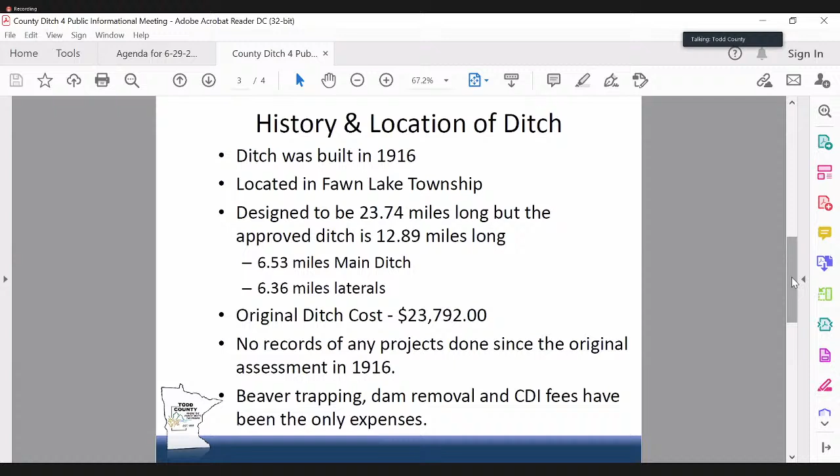Beaver trapping, dam removal, and ditch inspector fees have really been the only expenses on this ditch system—it's extremely good habitat for beaver. In 2013, when we did records modernization, we cleaned up all the assessment rolls and assessed for beaver issues from 2008 to 2012, totaling $5,484.23.

And then we got the ditch system brought up to zero. And then we started doing assessments, not yearly after that, but close to yearly.

2015 was $1,917.32, and that was all beaver dam or beaver expenses. 2018, $5,000 beaver expenses. 2019, $4,000 beaver expenses. The reason those are even numbers is because we wanted to have a cushion in the ditch, so as we kept doing beaver expenses, we would have money to cover it each year.

Then in 2020, we started dropping how much beaver expenses we were having. We were finally getting a little caught up. So in 2020, we did $500. 2021, we did $500. For 2022, we've been doing trapping again and some dam removal, so there's going to be those expenses again for the next year.

I think that's all I have, so that Mike can take over.

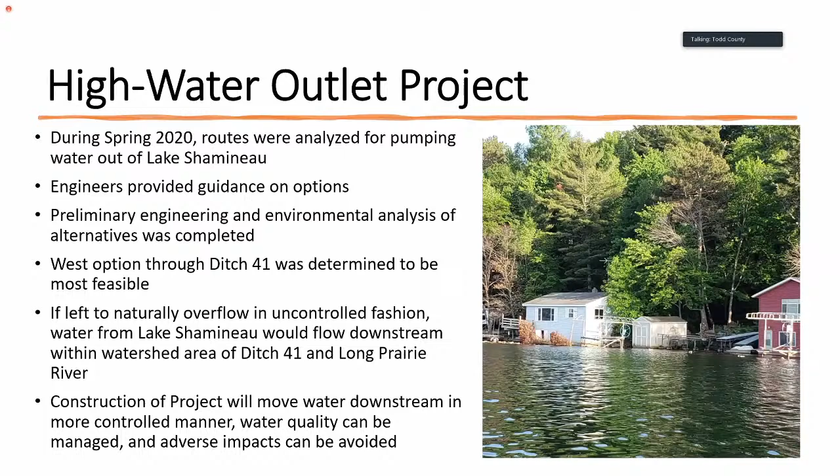The purpose of the high water outlet project is to establish a maximum operating level. It includes the installation of a lake outlet structure and pumping station at the west end of the lake. You have a route map in your handouts. Water will then flow west, eventually to Ditch 41 and to the Long Prairie River.

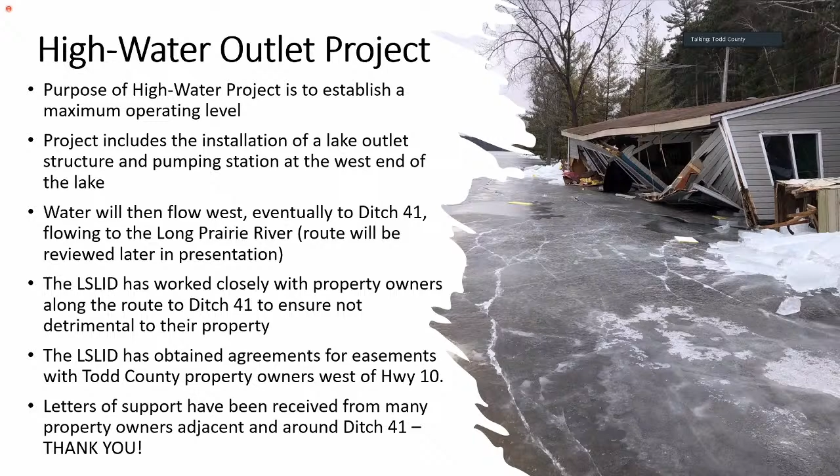We've worked very closely with landowners and property owners along the route - west of Highway 10 to the railroad crossing, where Ditch 41 starts. Those property owners are what we consider along our route, and we've worked heavily with them to obtain agreements for easements, which we have from all of them. We've also received letters of support from Todd County property owners, some along our route, some along Ditch 41, and other county residents. In fact, today we presented the Todd County Board with over 50 signatures on letters of support, and we'd like to thank those with us today for their support.

A couple of other project details: funding will be made through charges to Lake Shamineau property owners and also with Minnesota DNR flood mitigation grant funds. No petition costs will be charged to Todd County residents - all expenses will be paid by the lid.

We'd also like to thank Morrison County for their support. Commissioner Lemire from Morrison County wanted to be here tonight but had a conflict, and I believe he might be joining us through Zoom. They actually delegated authority to us for the project and have worked very closely with us on some of the project details. And they recently voted to contribute $200,000 toward the maintenance of Ditch 41 upon award of the construction contract for the project.

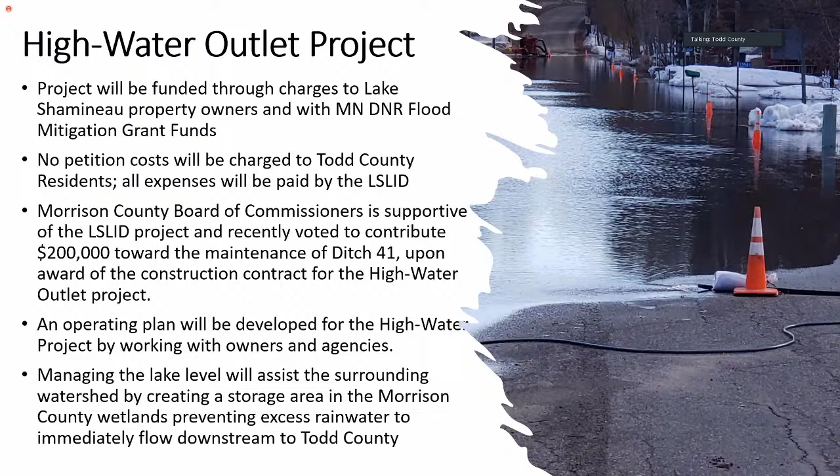An operating plan, as I mentioned, will be talked about more closely with Mike later in the presentation, but it's also a very key component of the project. Managing the lake level will assist the surrounding watershed by creating a storage area in the Morrison County wetlands, preventing excess rainwater from immediately flowing downstream to Todd County.

And last, but certainly not least, what if the petition is not approved? The high water outlet project will not be able to move forward, since access to Ditch 41 to reach the Long Prairie River is a key component of this project. And if it doesn't move forward, the $200,000 would not be made available from Morrison County. More importantly to us, there'll be continued flooding of homes and roads and more property damage around Lake Shamineau and Scandia Valley.

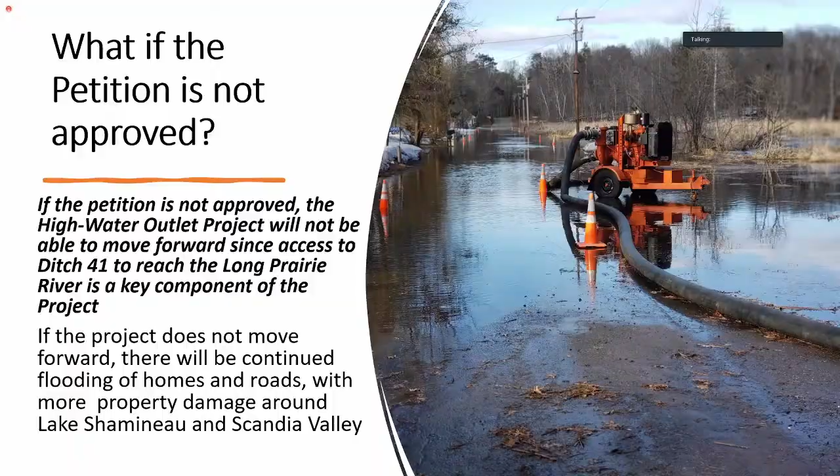Next, I'd like to introduce John Shockley, who is an attorney with the firm Ohnstad Twichell. The lid has hired John to assist with the legal aspects of the project, and he'll be reviewing the petition process.

Good evening, Madam Chair and members of the County Commission. My name is John Shockley, and I serve as attorney for the lid. I have extensive experience working with water projects, both on the side of the petitioner and on the ditch authority side. The petition process for this outlet petition is governed by Minnesota statute 103E.401. I believe your attorney, Mr. Dieter, had covered that previously, so I'm not going to go into great detail about that process.

As you know, Todd County Commission is the drainage authority, and express authority to outlet into Ditch 41 is started through the filing of a petition. The lid filed that petition with Todd County on March 8th, 2021. That described the necessity of the project you've heard tonight, and it also described the project features. Our petition, as was noted, included an engineering report on Ditch 41 and its capacity for the project.

That, of course, caused the County Commission to set a public hearing. We did have a public informational hearing on June 1st, 2021. If there are members of the public interested in where that recording can be found, we've listed out the web address.

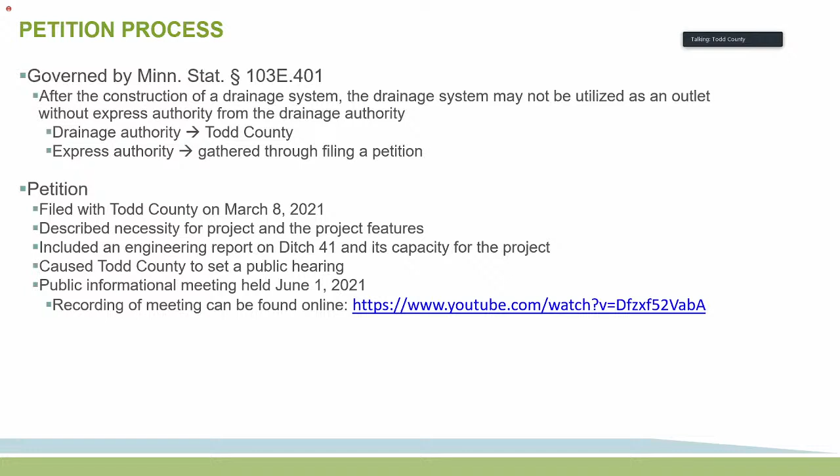Just briefly, the petition process involves the public hearing tonight. We're making our presentation regarding the project. And as has been previously noted, the main consideration regarding the granting of the petition is whether or not Ditch 41 has capacity.

I think this is more of a unique project than most. This is not just simply a property owner requesting an uncontrolled lateral to outlet into the existing ditch. Here you have a project in which it only pumps when the pumps are going, so you have controlled water flow into the system. During high water events, you're not actually adding additional water into the system.

So I like to think that it's very easy to satisfy the condition of whether there's sufficient capacity within Ditch 41, because at no point will this project operate when you have high water. So there will always be sufficient capacity within the channel.

If you grant the petition, we would anticipate that you would set the terms and conditions for our outlet. You would set the outlet fee, and then you would also describe what property is benefited by the use of Ditch 41.

Having worked on projects very similar to this, the operating plan is really a critical component, and we recognize that. That is how the ditch authority prescribes the controls of when and how we can pump water out of the lake into the ditch. And that really protects the property owners from ensuring that we're not pumping during high water time periods. It also sets forth that if we're violating that operating plan, we risk losing the ability to discharge into Ditch 41.

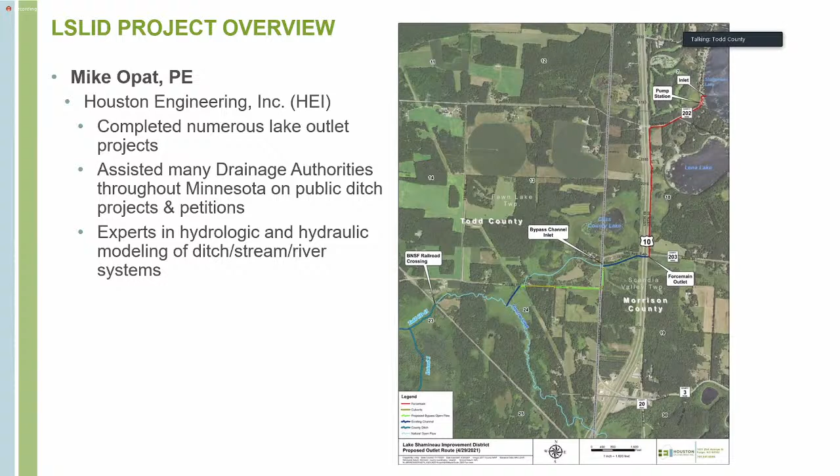So with that, the slides—many of you who were at the public meeting are going to recognize a lot of this, and it's going to sound familiar. As a courtesy to those who weren't at the public informational meeting, we're going to go over it again. Part of the reason a lot of these slides are here is just to build the public record. I won't necessarily get into all of it in great detail, just to keep things moving, but I definitely will hit on the important parts, and then we can address any questions that come up.

So a few quick definitions: cubic feet per second, annotated by CFS. That's a flow rate—how we in the engineering world, and how flood forecasters, deal with flows in streams. I know a lot of people like to hear things in gallons, so there's the conversion: 1 cubic foot is 7.48 gallons. We'll have more discussion on gallons in a second.

If we refer to AIS, that's aquatic invasive species. There's not as much talk tonight about 2-year flows and 100-year flows, but if we come to that, I'll explain it. As Cindy said, LSLID is the Lake Shamineau Lake Improvement District. I want to note that all the elevations in my presentation refer to the vertical datum of 1929. I know the county has other data in the 1988 datum, but the Lake Shamineau records and readings are all in the '29 datum, so we're designing our project to '29 for consistency, referencing that datum throughout.

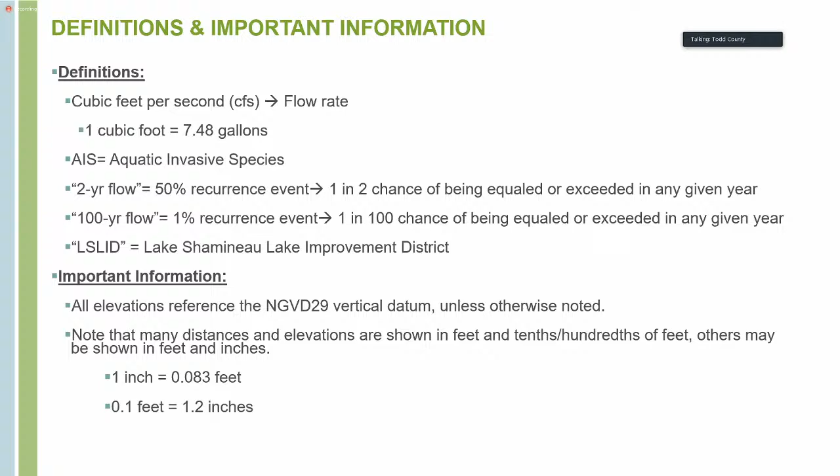Engineers like to do things in tenths of a foot, while architects and the general public typically like to do things in inches. So I'm trying to convert—as you saw in the public meeting presentation, we had both on there, and we tried to carry that forward here. 1 inch is about 0.08 feet, and 0.1 feet, or a tenth of a foot, is about 1.2 inches.

We're going to talk a lot about 10 CFS, and we get lots of questions on what that actually means. So you can see the cube there—that cube is 2.15 feet all the way around. Do the math, and that's 10 cubic feet per second. In real world terms, most people can understand and picture a culvert, so I included this diagram. If you had a 24-inch culvert on a typical slope of about 0.5%, as that culvert's right at full, not under pressure, the capacity is going to be right in the ballpark of 10 cubic feet per second.

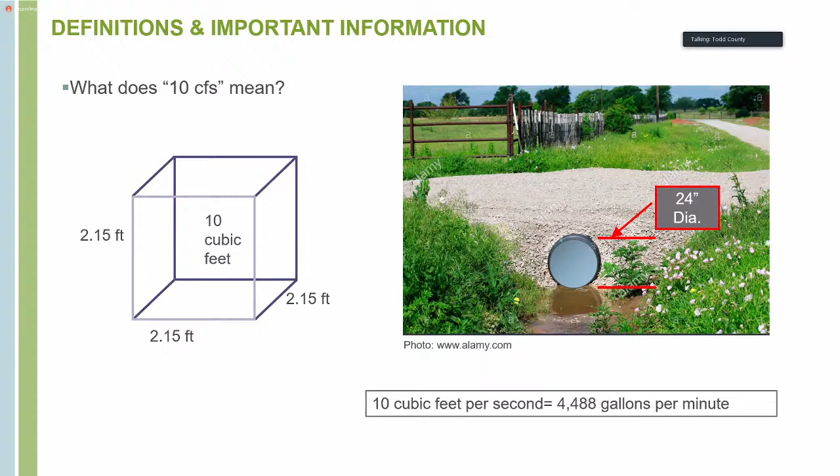So if you picture that amount of water in that culvert being added to the system, and look at the future photos and diagrams we have, that will hopefully help you visualize what that impact is going to be and how that water works its way through the system. In terms of gallons, 10 cubic feet per second translates to about 4,500 gallons per minute—that's what the pump is sized for. We can do all kinds of math on how many gallons that is; I'll talk about the volume that needs to come out of the lake in a second.

We got some questions, and there was discussion at a recent work session about process and order of things, so I wanted to hit on that. That green line is going from the beginning of the process to the end—feasibility study through operation. The blue line up top is where we're at with the ditch petition process, so we're still very early on. As Cindy talked about, some of the first steps were those feasibility studies where we looked at the different options and determined the most feasible option.

From there, we needed to do enough design to confirm that we can get the water from the lake to a suitable outlet, including Todd County Ditch 41. At this point, Cindy and the others went through the process, working with landowners to secure necessary agreements.

We've had preliminary discussions with the agencies involved in the permitting process to confirm there are no showstoppers. But the key component, as Cindy hit on, is can we obtain permission to use Todd County Ditch 41 as an outlet? Because if the answer there was no, then we have to go back to the drawing board.

So we need that answer before we can advance the design, which the agencies are requesting before we submit the permit applications. We submit those, they act on them for final approval. Assuming that all falls into place, we move forward with final design, put it out for bids, assuming everything is on budget.

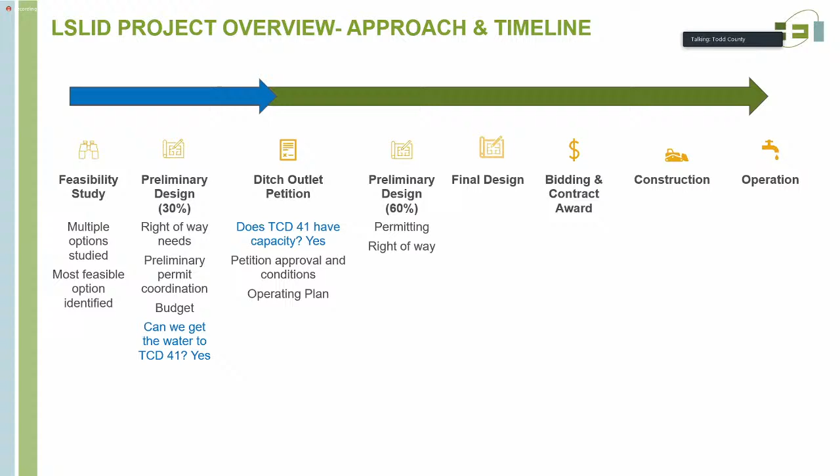The LID can award a contract, and then we move forward with construction. So there's definitely an order to things, and at this point we need a decision on the ditch petition before we move forward with any further permitting or design or related project components.

Just a little bit more on that. We've touched on the feasibility studies, a little more on the permitting. We've worked with the DOT, and they've confirmed that the project is permittable and that they can issue a permit to the LID.

The DNR has been great to work with. They've reviewed the preliminary plans, and again, no showstoppers. We'll work with them on the permit process, which will include approval of the final operating plan, and we'll get into that much more here in a second.

We've worked with Morrison County in terms of not only the highway department, because there will be impacts to their roadways, but we also have some zoning permissions that will be needed. We've been working through those, and again, no showstoppers. The direction we got from them was make sure you get everything squared away on the downstream end. Get that in place, come back, and we'll work through our process on the zoning.

Wetlands are definitely a key component, but those wetland impacts and permitting are basically confined to the footprint of the construction, so everything well upstream of Todd County Ditch 41. We've had preliminary discussions with those folks, and they've reviewed our delineations and approved those.

At this point, again, after the petition is hopefully approved, we'll be able to move forward with design. At that point, we'll submit those plans along with our proposed mitigation efforts, and those agencies will review and hopefully approve it. But we can't take that step until we have the ditch petition resolved.

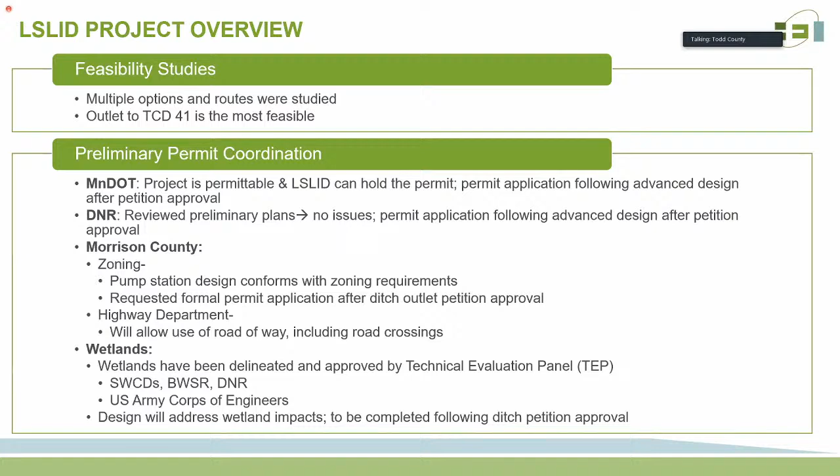We went through this at the public informational meeting, but I want to give everybody an overview of how the water gets from the lake to ditch 41. Although that's really not the purview of the petition, because that's basically tied to the capacity, which is independent of how the water gets there. But I think it's important to provide everybody with some background and context.

So Chris, I'm going to probably do some pointing here, if you can follow with the cursor, that would be great. The upper right-hand corner of this map is the westerly edge of Lake Shamineau. The proposal is to have a gravity intake pipe that extends out into the lake in this vicinity. That gravity pipe will flow and bend and come down to the curve in Aztec Road.

At that location, we have a filter and a pump system. That pump will lift the water up, push it through the filter. That filter will remove the aquatic invasive species and take that filtered debris and species and put it back into Lake Shamineau. Only the clean water will move downstream through the force main, which follows Aztec Road and then continues to follow the easterly edge of US Highway 10.

Again, we've been working with the DOT on that, and we should be good to go on that standpoint. From there, you can see Chris's cursor there. That will be the outlet structure, which will discharge the water into the recently cleaned out ditch that I guess is referred to locally as the Blue Line Ditch.

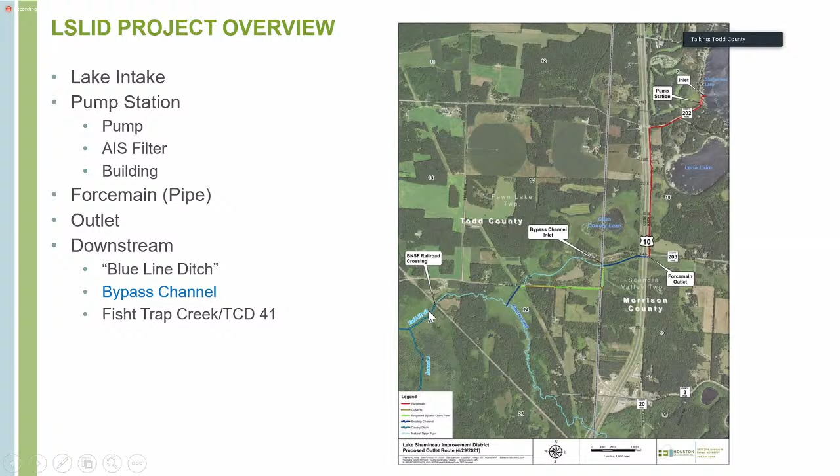So again, key features, we've talked about it a lot. The pump discharge rate is a maximum of 10 cubic feet per second. This is a balance between the downstream capacity and lowering the lake down as quickly as possible. There were other projects that were looked at and proposed with higher flow rates through discussions with agencies, property owners, and various stakeholders. The LID looked at that and struck this balance with 10 cubic feet per second.

And that's the focus of the project and the focus of the petition. As Artis hit on, the One Watershed, One Plan effort is underway. They've discussed high water issues on lakes like Lake Shamineau, and it sounds like those types of projects are likely to be included as a goal with that planning effort.

As we've also discussed, the lake is part of the watershed for not only the Long Prairie River, but the way it gets to the Long Prairie River is through Fish Trap Creek and Todd County Ditch 41. So we wouldn't be moving water from a different watershed into the Todd County Ditch 41 watershed. That's its natural watershed if it were ever to get high enough to overflow that way. And so again, as John hit on, what the LID is really asking to do here is to utilize the excess capacity in Todd County Ditch 41.

And through the operating plan and the pump controls, that simplifies the answer to the question of whether the ditch has capacity or not. So we'll still go through that here, and then we'll talk in detail about proposed conditions in the operating plan. In terms of anticipated operating period, the calculations that were done to help guide the LID...

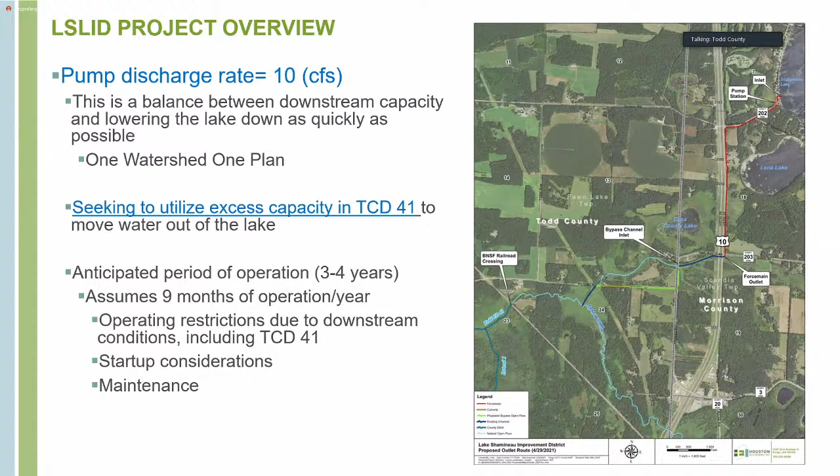Some more key features. We've talked about the AIS. I mentioned the filter — again, no AIS will be transferred downstream. We've looked at the water quality in the lake. It's very good. It should help water quality conditions downstream.

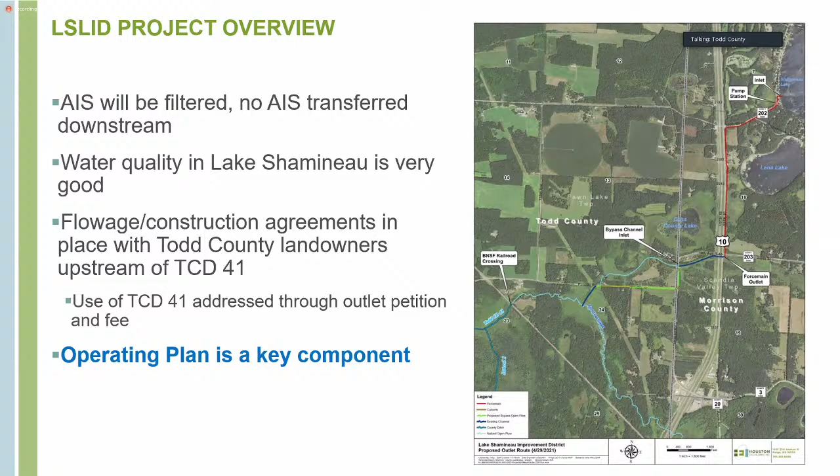We've mentioned the flowage and construction agreements with the landowners between the outlet of the force main and Todd County Ditch 41. And again, the point of the petition here is to secure permission to use the ditch as the outlet. And the key point here is the operating plan is the crux of the whole discussion. So we've established that it has capacity, and now it's just defining when it does and how much, and what are the associated conditions of moving that water through the system.

So let's dig into the operating plan, and we'll talk about it in general. Then I'll get into some of the brief technical components, and then we're going to circle back at the end to specific criteria in the operating plan. So what is an operating plan? It's an actual formal document. It dictates when the pump can be turned on, including specific criteria for Ditch 41. It'll dictate when the pump must be turned off, again including specific criteria for Ditch 41.

And then it will dictate where the conditions need to be monitored and how frequently they need to be monitored, and who will be doing the monitoring and who needs to be notified, and all those details.

So the board has been provided with a draft, and we'll talk about that. I know we just received some input from County Engineer Fellbaum, so we appreciate that, and we'll definitely reflect that in the next draft. We'll talk about the process for moving from draft to final here.

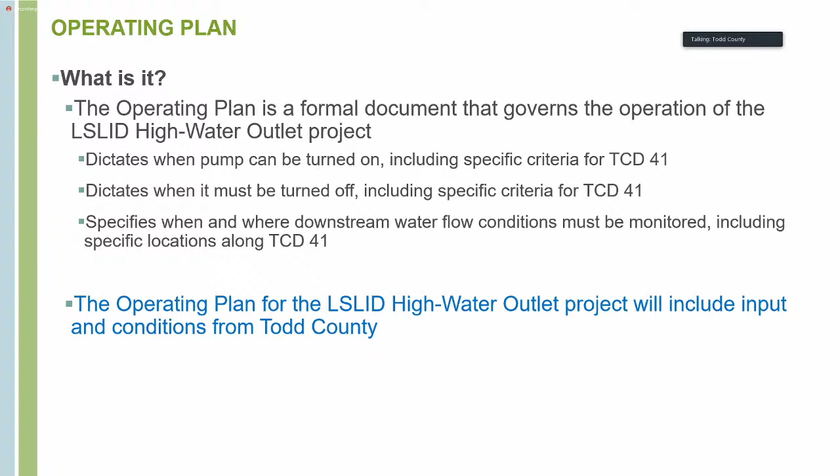It's important, right? This is the whole point of interaction and coming out of the hearing and further discussions, working together to put appropriate and reasonable and acceptable conditions into the operating plan that will govern the operation of the project. So, key points here.

The lid cannot arbitrarily change the operating plan in the future. The DNR is going to make this operating plan a condition of their permit, but they've told us that anything that impacts Todd County Ditch 41 is going to be up to the county and the drainage authority. So they're going to wait to receive your input, and they're going to confirm with you that you agree with those conditions. And if there are any future updates, they're not going to allow those unless the county signs off on it.

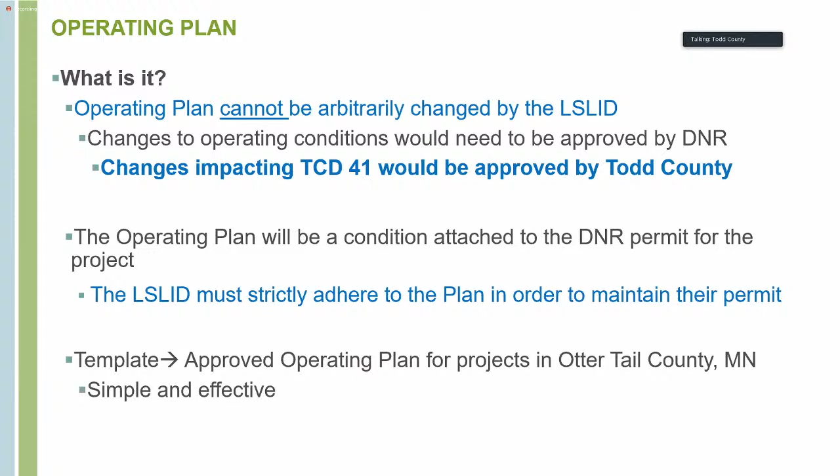Again, the template we're using is a plan that was used for other projects, specifically in Otter Tail County. It's intended to be simple, but it's proven to be effective. So we're not going to break something that isn't broken there. It's a good, effective plan, and it's proven to work.

So in simple terms here, the operating plan dictates when the pumps are on and when they're off, and the lid has to comply with that. Simply put, if the ditch does not have capacity, the lid will not operate the pump. If the ditch does have capacity, the lid might operate the pump if other conditions are met and if there's a need to operate it. Okay, simple terms, that's the crux of the whole thing. The rest of this stuff just helps identify and further define those points.

A key question we get is, is the lid guaranteed they're going to be able to operate their pump? No, I want to stress that. The operating plan does not guarantee that the lid will be able to operate their pump. Even if the homes are flooding out and roads are underwater, if the conditions in the operating plan can't be met, they cannot run their pump. The lid understands that. They have wrestled with that risk. They understand that risk, but this is their best, and quite frankly, probably only option is to go this route. So they're taking that risk on and they're going to live with those conditions.

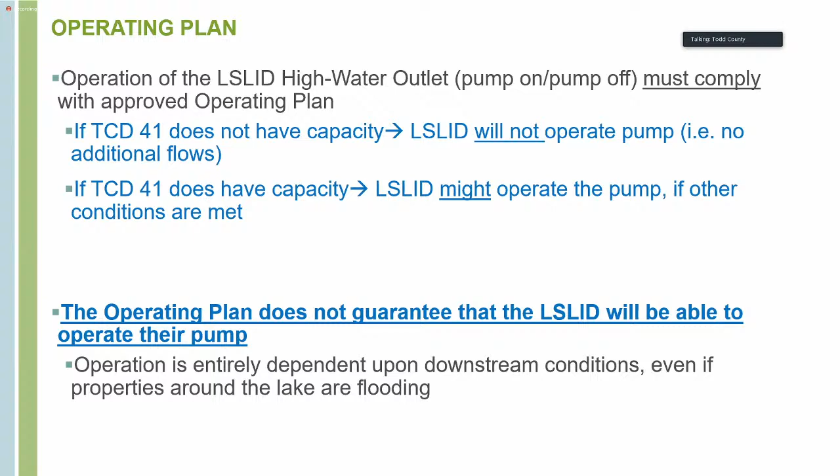So some more on the operating plan. Again, we want the county's input on this, and we provided the draft. We'll solicit input, we'll work through that for as long as it takes. Hopefully we can get this wrapped up pretty quickly.

One question we had was notification. The lid who will be operating the pumps will certainly notify the county. We can work out those details as to who is notified, how they are notified, all those things. We'll take your input and we'll incorporate it into the plan.

As we talked about, the operating plan will be a condition of the DNR permit. Again, they are going to rely heavily on input from the county. And another key feature here is because it's tied to the permit, if the lid does not operate the project in conformance with the operating plan, they are at risk of having their permit suspended or revoked, such that they couldn't use their project. So they're not going to invest millions of dollars in a project and then improperly operate it and have it sitting in mothballs because they didn't operate in conformance with the operating plan. So that's the teeth in it. That's additional protection for the county and the landowners, is that they've got that hanging over their head in terms of the teeth requiring them to operate in conformance with the plan.

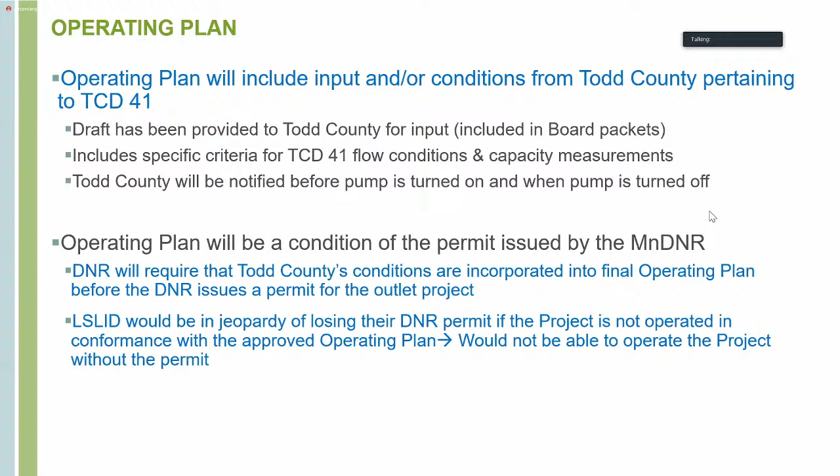All right, some additional key points. When we start talking about the plan and capacity, and when the ditch is full and when it isn't, those are the types of things we want to specify in that plan, so there's no arguing or subjective discussion about when it's full and when it's not. That's what we want to get hammered out as best we can ahead of time, and that's what we want the county's input on.

Another thing I like to do is etch a line in the concrete and paint that etch. If the paint wears off in a year or two, we've got that etched mark in there and we go back and paint it again, big bright red, so everybody can see it. The LID can see it, the county can see it, the landowners can see it, the general public can see it, and everybody knows where we're at in terms of that critical elevation at each spot. We'll talk more about that in detail.

We have what we call primary gauges, which are generally at publicly accessible locations like road crossings. And we're proposing some secondary gauges, which are generally located on private property to help us manage specific criteria that are in some of the agreements the LID has with landowners.

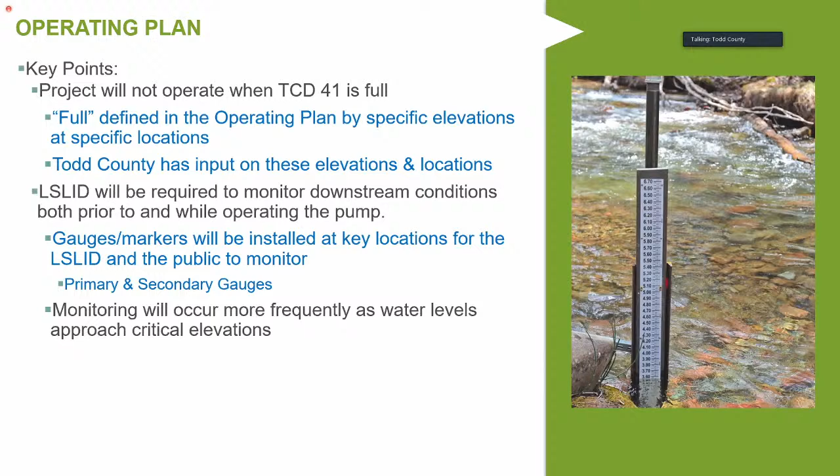Another key feature is that we're proposing the monitoring of the system will occur with more frequency as water levels rise and approach the critical elevation. So if we had conditions like we've had recently and the ditch is down low, adding 10 CFS is not going to raise water levels anywhere close to full capacity, so we would monitor it less frequently as proposed in the plan. If water comes up a few feet, we definitely want to keep a closer eye on it, so we'd be monitoring on a more frequent basis. We'll discuss that more in a second.

Getting into a couple specifics on proposed monitoring locations, our primary gauges again are trying to identify public roadways as good options. Starting from the upper end, we're looking at Pulaski Road, Quicken Road, and then downstream at County Road 28.

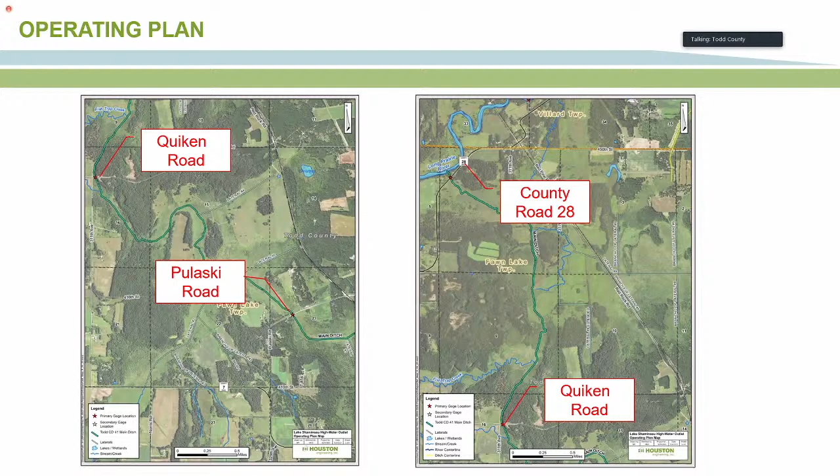We've looked at potentially adding something up near the railroad bridge, but access there is a bit of an issue. We've begun discussions with the railroad to see what we can do there, but if we can't put it on the bridge, we can work with some of the landowners there hopefully. The good news is that due to the slope of the ditch and the analysis we've done, we can handle the monitoring at that location at Pulaski Road, and we don't have to have a gauge at the railroad to help manage the system.

Again, we've talked about notification. The plan also includes considerations for weather and seasonal climate conditions like spring runoff. So we'll be using available forecasts for the river and other streams to help guide the operation of the system and the need for monitoring.

Another key feature is that blue line ditch upstream that I talked about. That ditch is much, much smaller than Todd County Ditch 41, so we've got restrictions on it based on agreements with landowners. That's probably going to be our limiting factor on whether we can move water with the pump or not. We've got to get through that bottleneck before we can get down to Todd County Ditch 41, so there's some additional protection there, so to speak, in terms of water coming down the system into Todd County Ditch 41.

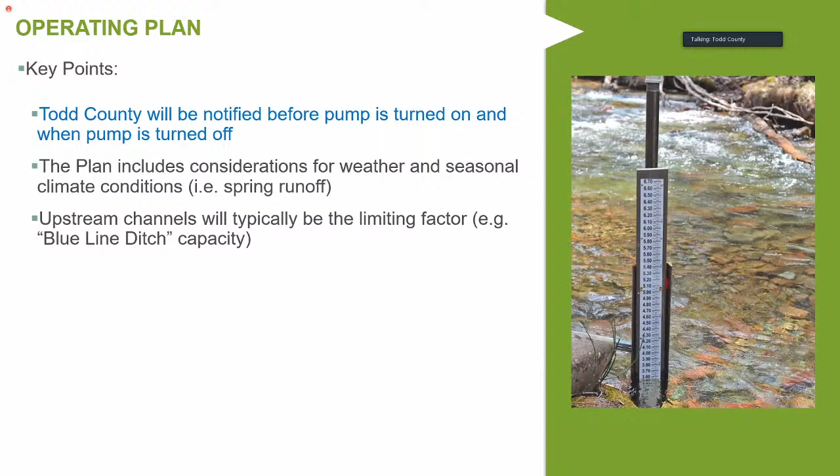So where are we at in the process? I know there were questions on this in terms of the draft operating plan. We worked with the LID to prepare an initial draft of the plan, using a template from the operating plan for the Little McDonald and Devil's Lake project in Otter Tail County, and addressed specifics for this project. We took that and met with the DNR and got their input in terms of format, content, and general conditions from their standpoint.

They said, look, this is all great, but you're going to need Todd County's input on the ditch. So we took the DNR comments, created an updated draft. We waited to get input from the public and the Drainage Authority at the public meeting held on June 1st, then incorporated those comments and that input into an updated draft and provided that to the county recently. We were looking for, eventually, feedback on the triggers and what the conditions would be in there to help facilitate the discussion.

We took our updated modeling results and came up with proposed trigger elevations and put those into the document, to help facilitate the discussion. We fully appreciate any further discussion the county wants to have on that. For the board, your packets included version 4, which did not have the trigger elevations in it. We've updated it to version 5 and provided you with the 2 pages that have changed, now inserted into your packet. So when we take any additional feedback tonight or in the coming week, we'll update another version and get the version control taken care of.

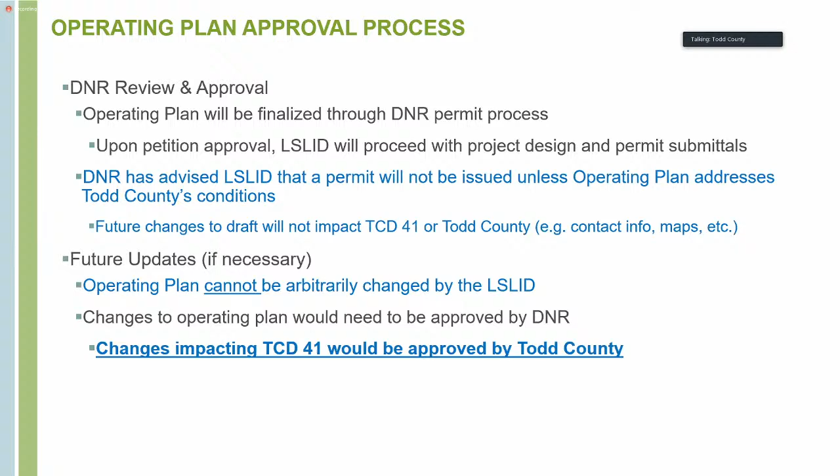So Kurt, how are we doing? Good, okay. I said 2 hours is when people say that's enough, so we're an hour and 5. I think if we broke it right now, we'd lose continuity. But the restrooms, we maybe didn't say that—restrooms are right over there. If somebody needs to get up and stretch or stand in the back to move, but let's keep moving unless the board feels different. Good to go?

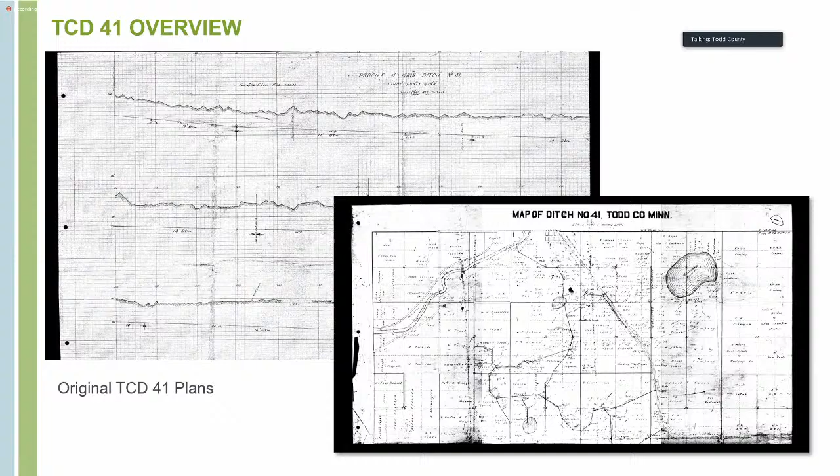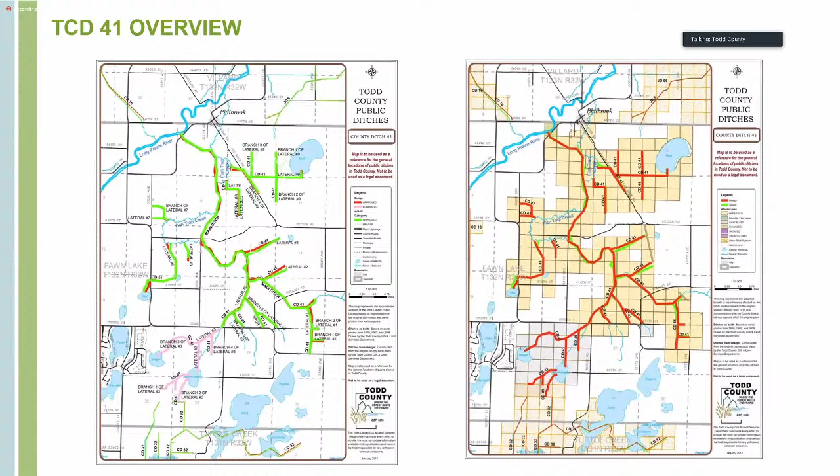The original plans on this slide actually look much different. There were other areas included that aren't part of the ditch system now—Nancy mentioned it was originally going to be over 22 miles or something like that, so it's kind of interesting from that standpoint. The map on the right is the ditch system, and those shaded boxes are the benefiting properties that are part of the ditch system.

Originally constructed in 1916, it was designed with varying ditch slopes and varying ditch bottom widths. The laterals were designed typically to enter the main ditch at elevations a couple feet higher than the main ditch. The watershed area, which includes Lake Shamineau at the upper end, is about 81 square miles, so it's a pretty significant amount of water. It's also taken from Fish Trap Creek, which is taking base flows out of Fish Trap Lake in that system.

As Nancy mentioned, it appears there's minimal documented maintenance that has been done, with the exception of beaver dam removal and trapping throughout the system. I know there's been discussion on a potential cleanout of the ditch. I think it's important to note that a cleanout can only be done to the original condition.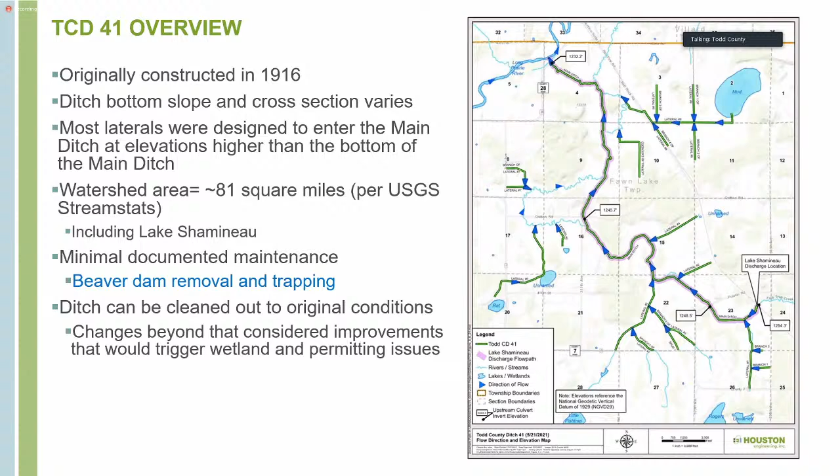Anything beyond that is an improvement that would then be subject to current permitting and regulatory requirements, so that's definitely going to be a challenge at best and probably impossible in reality. We can certainly look at future maintenance, but in our opinion we don't need to do maintenance in order to accommodate the flows from the project. Any maintenance that is done would just provide additional capacity and allow more water to move through the system, but it's not a necessity to get that done before any water comes in from the lake.

Let's talk a little bit about current conditions. I mentioned this at the previous public meeting - we did do a drone flight of the main ditch alignment back in November of 2020. The key points were beaver dams at that point in three general pockets: the upper end, the middle, and then downstream through Bruce Hudala's area.

After the public meeting held on June 1st, the LID and I met and talked about some of the questions and concerns raised. They authorized us to go out and collect additional information and further refine our modeling and analysis of the ditch, so we sent a crew up there. I can tell you those guys were not happy - I know one of them picked off 22 ticks in one day, and they were trudging through a lot of muck. I know Nancy can testify some of that peat is pretty nasty, so I've got to give kudos to our guys for doing that. The LID helped us coordinate access for that, and I appreciate those landowners for allowing us to access the ditch for that work.

The good news was we found fewer beaver dams. Particularly on the upstream end, it looked like a lot of those were gone, and in the middle as well - the dams are either gone or had been manipulated such that they weren't holding back as much water. So that was good.

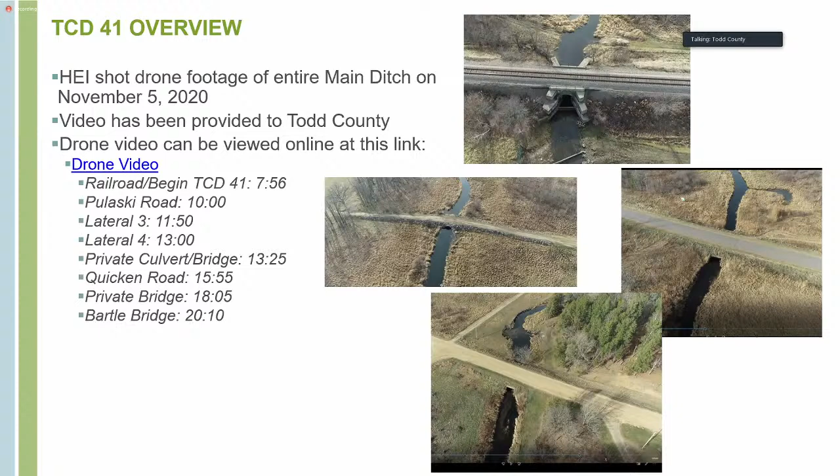This is a similar slide to what we showed at the public meeting. It includes a link to the drone flight - I'm not going to play the video, it would take 20 minutes to go from top to bottom, but if there are specific questions we can certainly bring this up to address any particular concerns.

So a couple key points with this map - I think this one might be one of your handouts. As we talked about in the project route overview, the water is going to enter Fish Trap Creek, which then becomes Todd County Ditch 41 at the railroad crossing there.

So we've identified that in the map as the point where the water would enter the ditch. It's going to flow down the main ditch and be contained in the main ditch. It won't be flowing through the laterals or breaking out into the floodplain. We'll be using the main ditch to get all the way from the railroad down to the Long Prairie River.

In addition to the laterals not being used, we're also not going to be adding flow at the top end of what I call the old creek loop there at Quiken Road, where I'll point it out. This is the original creek channel. There were no improvements done to that as part of the original ditch project. There's a culvert through 311th Avenue here, and the bottom of that culvert is higher than what we're proposing to set for the maximum operating level with the pumps running. So we wouldn't be pushing any water to the west there.

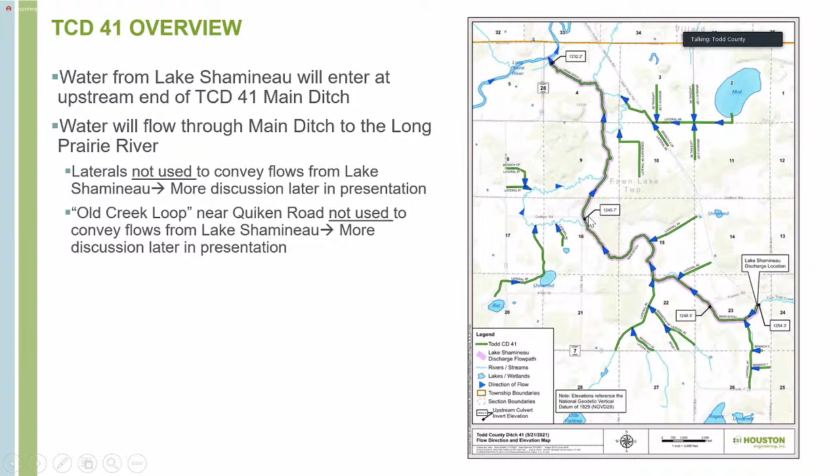And we'll get into more detail on that here in a second. So this map again is just to more or less show the extent of the ditch. I brought this in just to address any questions that might come up.

As we've talked about, the crux of the discussion here with this petition is whether or not the ditch has capacity. The simple and direct answer to that is yes, and we can state that for the following reasons. We've done channel surveys, we've done some hydraulic modeling, and we've observed the ditch visually.

But it comes down to that operating plan. You can look at the photos there and see how deep the water is in there. Through that operating plan and the controls of the pump, we know that we can limit adding flows only to times when there is sufficient capacity in the ditch. So from here, we really just need to focus on the conditions in the operating plan to make sure it addresses any limitations that are required to ensure that's the case.

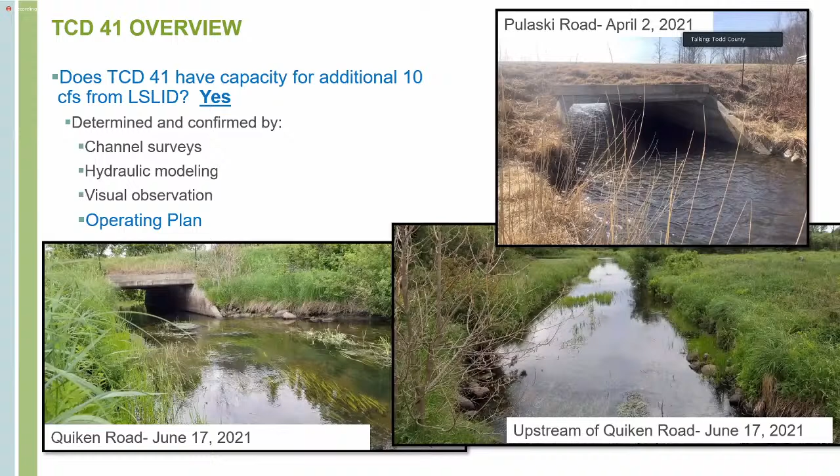I want to just talk about hydraulic modeling because we are going to talk about the model. In terms of the operating plan, the pump and the plan are dictated by actual conditions in the ditch, not the model. So we can talk about the modeling and look at the details of that model, and you can get second and third opinions on that. But as I say here, the proof is in the pudding, right?

We're going to look at the actual ditch at our monitoring locations, and we're going to look at those conditions and say, is it full or not? If it's full, the pumps aren't on. And if it's not, the pumps might run. That's what it boils down to.

Now, we do have a model. That model should be looked at as a tool. We can use it to help with the monitoring and the operation, but the real world conditions in the ditch are going to control the operation of the system. That's a key point. I want to make sure we stress that.

I also want to point out that as the conditions are finalized, the LID is going to have to look at that. As we talked about their risk in the operation here and investing in the capital side of things to build the project, based on those conditions, do they feel like they're going to get enough capacity and operation time to pump water? That's for them where the model will be helpful, because they can look at it and say, okay, based off of past and recent conditions, the model tells us that, yeah, we think we can get 9 months of operation and that we think we can get our lake down in 3 years as assumed.

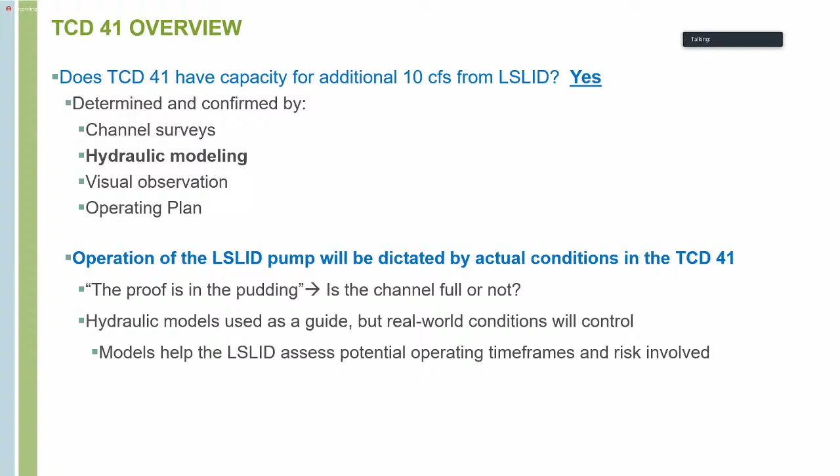So another key point here, when we say does the ditch have capacity, the answer is yes. I want to stress that that's based off of existing conditions, based off of the survey data that we collected on June 17th and 18th, and also back into April. Those are the conditions reflected in the model and in the diagrams that you're going to see. If the ditch was cleaned out, the conditions would get better, beyond normal beaver dam removal.

So conditions would improve, but it's not necessary to do those cleanouts in order to realize any of the capacity that we're talking about the LID potentially using. So to stress that, cleanout would provide additional capacity potentially, but it's not necessary to pursue that before adding water from the LID's project.

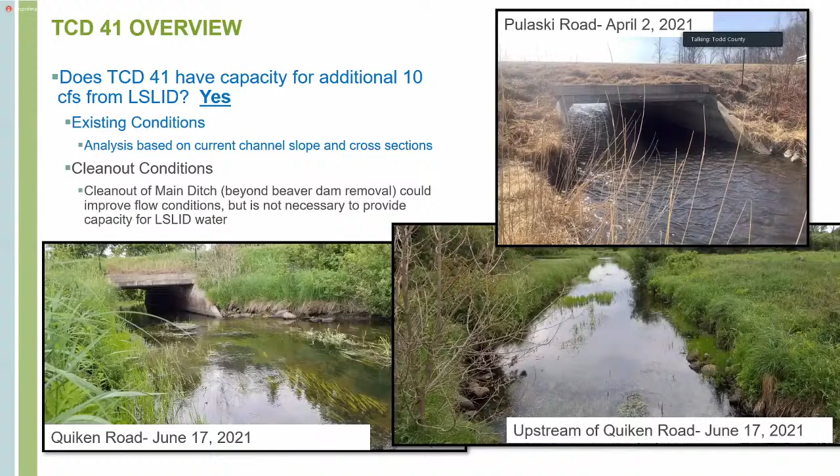Again, I've noted some photos here. You can see the dates on those and the locations there. We'll see some more of these types of photos here in a second with some more diagrams. So this is where you might recognize some of these slides from before.

When we talk about hydrology, we're talking about the quantity of water, and then that transitions into hydraulics, which is how that quantity of water moves through the system.

So we went into a lot of detail on this during the public informational meeting because at that point, we were still talking about whether the ditch had capacity or not. At this point, as we've talked about, we've established the answer to that is yes, and we're now moving into the conditions phase. So while this is all still relevant and important, it's not critical to the discussion.

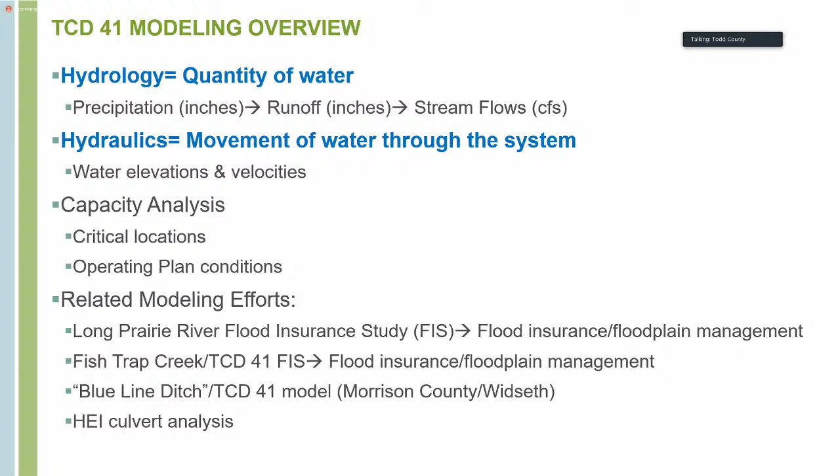So I'm not going to go into quite as much detail. Again, it's here to be on the record, and I can certainly address this, but it's not critical to the discussion here. So with that, this is a diagram.

This goes back to the original ditch petition back in March. From here, the LID has continued to provide additional information to support their petition and further refined the analysis. So we made some assumptions, for example, at this location that the water was 3 feet deep when we started to pump.

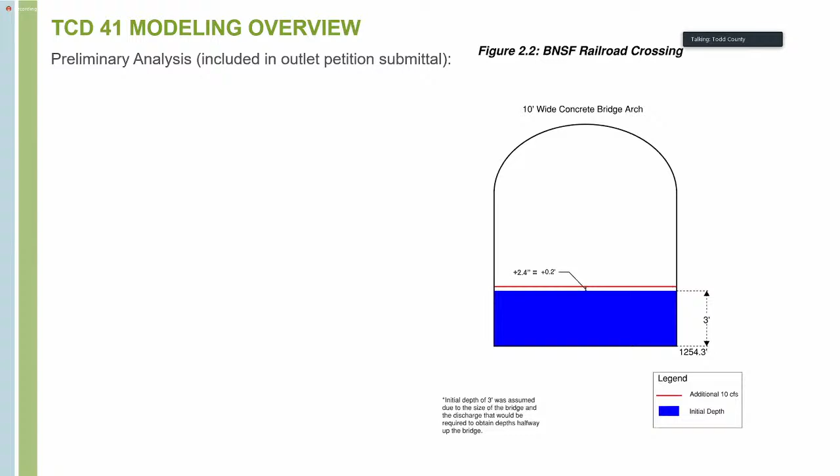With the modeling we've done now, we know what a starting condition is. And so you'll see a slightly different example of this, but the short answer to the story is the results don't change significantly. And what we're finding is that even as we refine the models, add more detail, we're still getting the same answer. It's just a refined answer with a higher level of confidence, so to speak.

So again, the hydrology component of the analysis that we're working with at this point is not critical, and I'm going to explain that as we go forward. There are existing models that are out there, and we are using those as a basis.

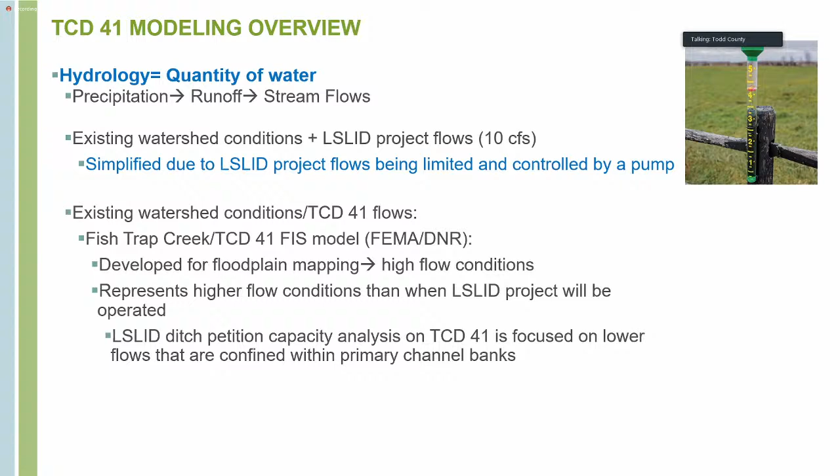For example, FEMA and the DNR have a model of Todd County Ditch 41, but they're using that for floodplain management, and they're looking at the water that's going out in the overbanks and flooding fields and roads and those types of things. We're looking more at, obviously, the flow in that lower channel, the primary channel, which those models don't have a lot of detail on. So that's why we went out, collected more survey data to supplement these models.

Okay, a lot of information here. We went through this at the last meeting. So as we talk about the quantity of water, fortunately, the government through the United States Geological Survey has a nice website called StreamStats. Anybody here can go there and you can start clicking anywhere in the watershed. And as long as you click on a waterway that they have identified, it'll tell you what the various estimated flow rates are for different recurrence events.

So again, a 2-year event, that doesn't mean it happens every 2 years. That actually means it's a 50% chance. So, do the math and flip the fraction over. It's a 50% chance on any given year. Okay, so what's the significance of this?

The point I want to make is a 2-year event in the stream correlates to about a 2.6-inch rainfall. And when you factor in the portion of that getting soaked into the ground and some of it evaporating, the net result at the upper end of the ditch is 95 CFS, okay? 95 cubic feet per second. We're talking about adding 10 cubic feet per second. So we're roughly 10% of the flow at that rate.

Now, the bottom point, another key point here, is when engineers and scientists talk about bank full capacity, that's the maximum amount of water that a channel can contain before it spills out and floods in the overbank. Typically, what's been found over years and years of analysis is that, especially in a case like this where the water's been flowing through here for 100 years, it's very predictable what a system's going to do in response to that flowing water. And typically what we see is that the bank full discharge typically corresponds to about a 2-year event, somewhere around a 1.5 year to a 2-year event.

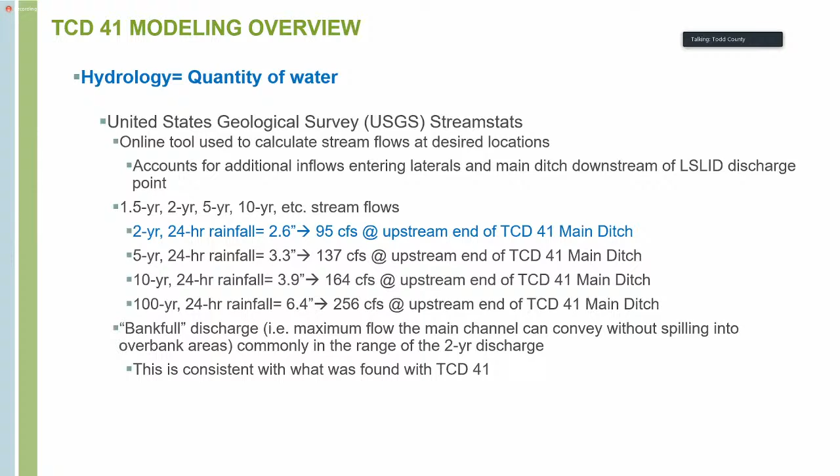You may recall at the June 1st meeting we talked about measurements. The LID has had folks going around measuring down from these culverts to get depths. That helps us calibrate our model, and it also helps us convey in real world terms what the impacts of the project will be. You may recall seeing some of those examples. I have updated examples we'll go through here in a second.

Rating curves: in simple terms, we plug in assumed flows, run those through the model, and look at the results. That helps us identify at what point the water starts to break out of the channel, or at what flow rate a certain culvert might get inundated. Then we can focus the rest of our efforts after that.

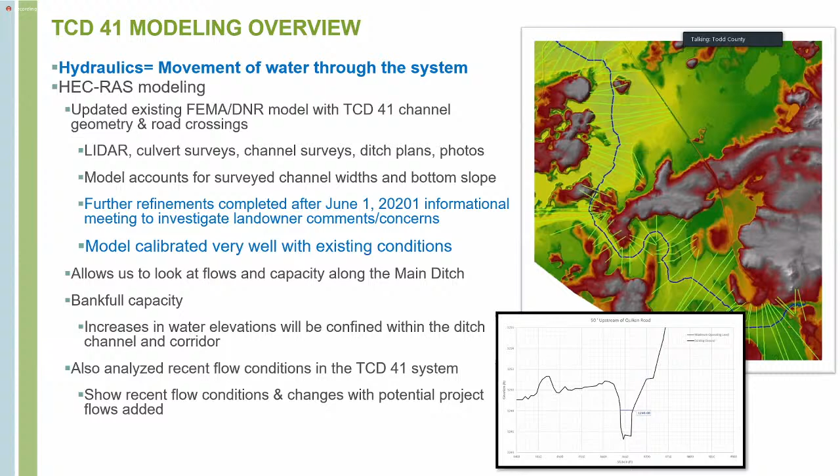Alright, welcome back. I had some comments that I'm hard to hear, I think I'm wandering from the mic. So I told those folks that if I wander away to wave, and Kurt will get my attention, and I'll chain myself here. So with that, where we left off, we were just starting a discussion on the modeling, which I'm sure is everybody's favorite topic here. But a few key points: we had talked about modeling at the June 1st meeting. As I mentioned, the LID sent us out with a mission to collect more data and refine our model. So we did that. The good news is that the results are that we came out with a model that calibrated very well to the conditions we saw out there on June 17th and 18th. So again, that gives us a lot of confidence that this tool is reliable and we can utilize it as we move forward. With that, I'm going to talk through the process here a little bit.

A key component of the analysis, and how we'll determine what the maximum operating level will be, is exactly what the capacity of that channel is.

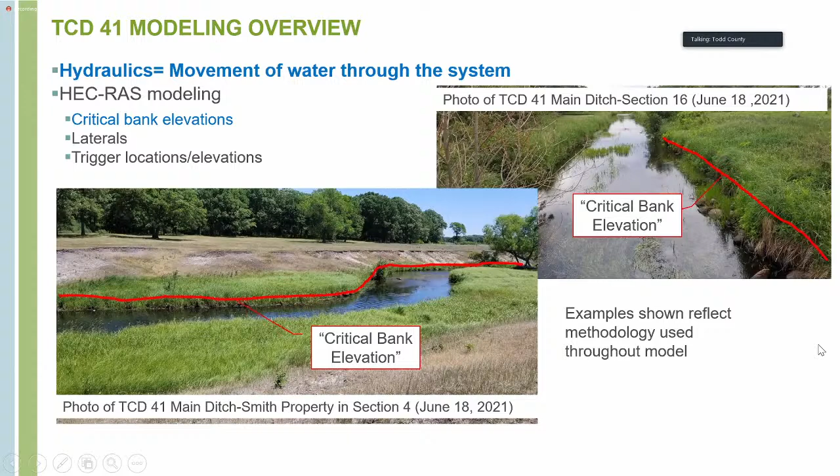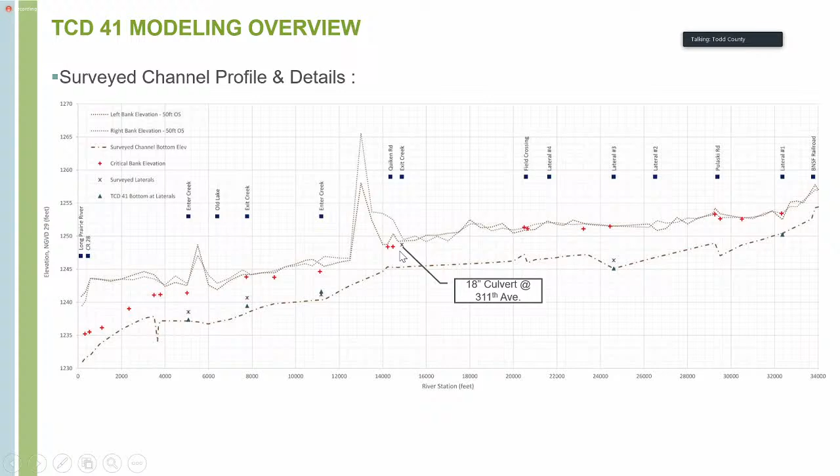One last point on this slide: the culvert through 311th Avenue, near Quiken Road near that intersection, is where the old creek loops out and around. That 18-inch culvert controls how much water leaves the main ditch and goes into that loop. You can see it's considerably higher than the bottom of the ditch channel. Just as we're using these red marks, we're also using that culvert as a controlling factor to make sure when we're using the pump, the water isn't going to be above that culvert. So we're not going to push water over to that old creek loop.

So as I talked about, we surveyed those channel features. As we went through the system, we also surveyed the water surface elevations.

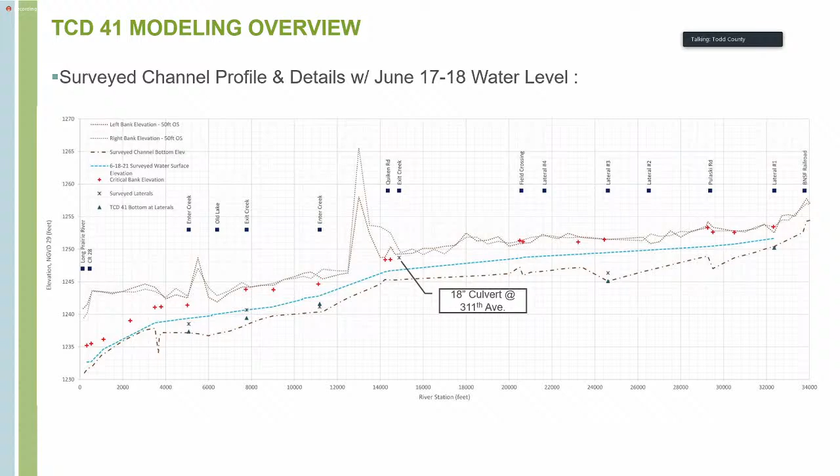Throughout the system so that we obviously knew what it was, but then we can also take it to our model and say, all right, we've updated our model. How well does it predict what we're actually seeing out there? And that's what this next slide indicates.

I recognize this may be hard to see in the back. The point here is that it's difficult to tell the difference because the lines actually correlate very closely, particularly in this reach between Quiken Road up to the upper end, which was kind of the critical reach for setting the maximum operating levels. It coincides with the slope in that area, it's much flatter. That's kind of the limiting factor when it comes to the capacity of the system.

So the good news here then, this gives us confidence. There are some differences I'll point out. Some of those are attributed to potentially beaver dams, which I know have been moved. But that's not a critical component of the model. What we were shooting for was a strong calibration in this reach, and that's what we saw.

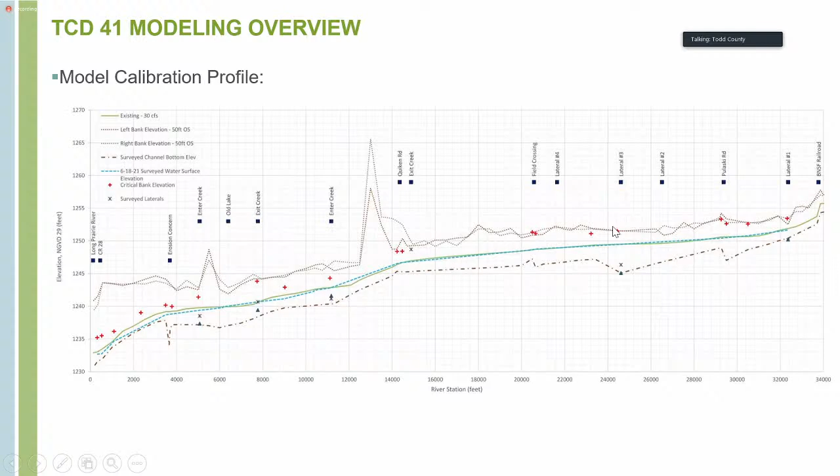So what does all that mean then? We can look at that profile and say, all right, real world conditions, the water elevations we surveyed on the 17th and 18th, obviously it's dry. I think most people recognize that the water levels are relatively low. What would happen if the project was constructed and it was operating on that date? Again, I recognize this is difficult to see from the back, but that's kind of the point. Those two profile lines are basically right on top of each other.

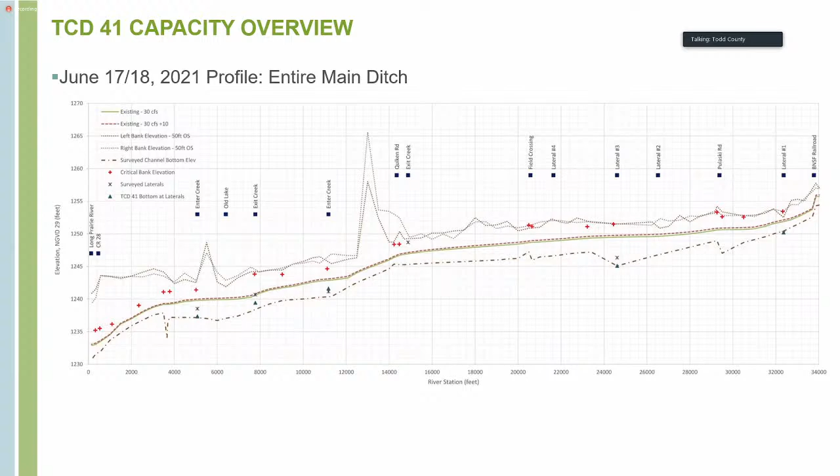So some of you might be saying, I thought you've been telling us that the difference was 2 inches. Well, it depends on the scenario. Here, we're talking about lower conditions, so as we add 10 CFS, that's a greater percentage of the total flow. In this case, 10 CFS would be more like 25% of the total flow. When we're looking at the higher flow, which we'll get to in a second, that 10 CFS is more like 10% of the total flow, and so the corresponding difference is thus lower.

So again, real world conditions, the hope here is that people can better visualize this if they've been out there and looked at the conditions in the last couple of weeks. You've seen how much water's in the ditch. You can add 3.5 inches at Pulaski and about 2.5 inches at Quiken and get an idea of what the conditions are going to be if the pump were running when the water is at those elevations.

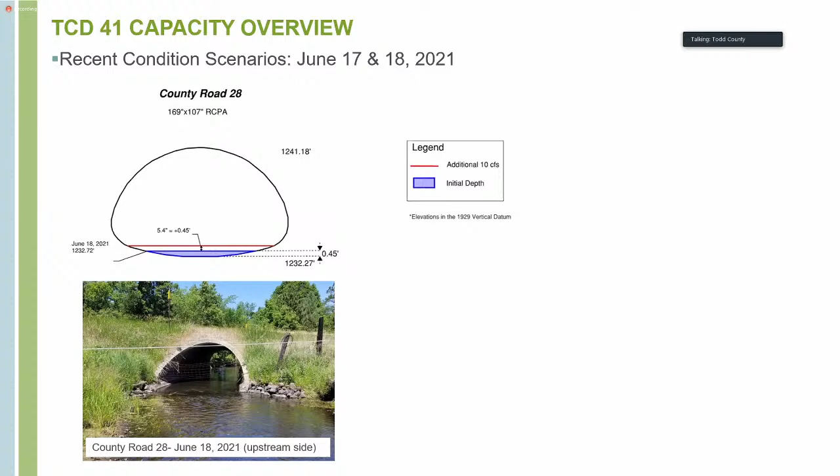So again, a couple more examples. This is just another one down at the downstream end. Again, not much depth here going through. I think the velocities are much higher, that's why you're not seeing a lot of depth. Down there, due to the shape of the culvert, there's an increase of about 5.4 inches or somewhere in that neck of the woods. So plenty of capacity there if water would have been moving from the lake project through the ditch system at that location.

So again, we've talked about this numerous times throughout the presentation. After establishing that the ditch has the capacity, the next step is to work towards the conditions and setting the maximum operating level and the associated triggers and monitoring locations in the operating plan. So we used the model we've been talking about as a guide. I want to reiterate, actual operating conditions are going to be based on the actual conditions observed in the ditch. But this is a tool that helps us set those guidelines and track water levels in between those monitoring locations.

As I mentioned earlier, we've got these red critical bank elevations up and down the system, and we don't want our water elevation to exceed that. So we ran various rating curves through the model and identified a curve that closely hit those red lines or red dots, but didn't exceed them. You'll notice, I think this was the critical one here, downstream of Pulaski Road. Again, we're seeing the effects of the flatter ditch section through there. That became the critical controlling location.

And so we said, all right, this looks like a reasonable profile to use as our basis to pull out those trigger elevations to then include in the draft operating plan and help with the discussion. So again, we feel it's reasonable.

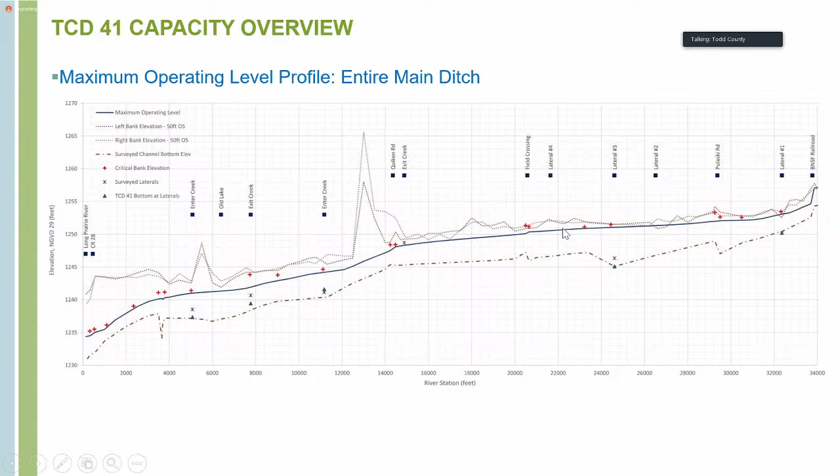It addresses the concerns over the capacity of the ditch. As you'll notice in a lot of locations, this proposed operating plan is actually well below the critical elevation, so there's additional capacity and additional freeboard there. And really the controlling factor is here at Pulaski Road. So I did a couple zoom-ins on this particular one just to help with that.

You can see the lower end down here, Bartles and Smiths in that area, that channel. As you can see with these dotted lines, the full channel is very deep, but we're not looking to utilize that full channel. We've identified that lower channel - if you recall that picture with the grass and that defined channel down there, that's what that correlates to. That'll be an important point when we talk about erosion.

So again, you can work up and down the system. You'll notice the laterals - I know there's questions on the laterals. Yes, they show to be coming in lower, but the proposed operating profile is not going to negatively impact the capacity of those laterals. And we'll talk about that in a little bit.

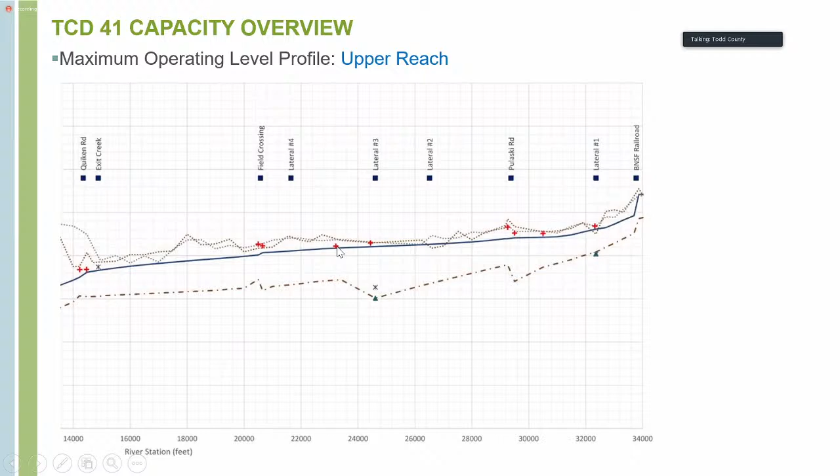So moving to the upstream section, again, just a closer look. Here you get a better look at that critical elevation, a couple of these where we're still below those critical bank elevations. So again, just some pictorials here at that maximum operating level.

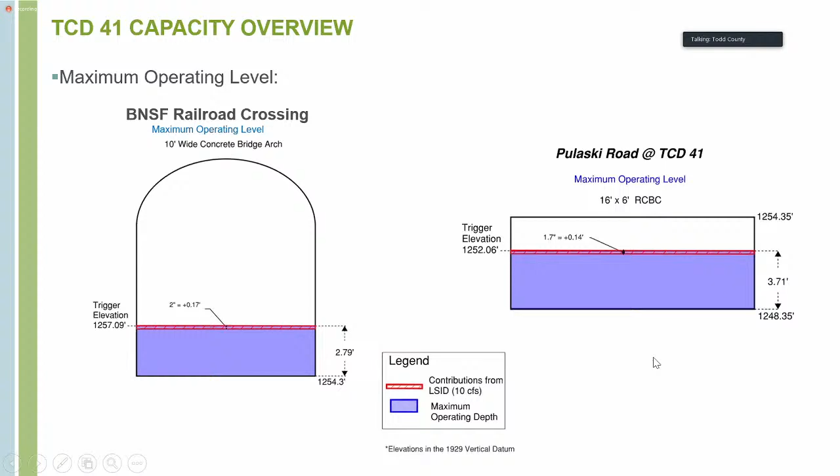At Pulaski Road, similarly, the total depth at that maximum operating profile will be 3.7 feet, of which at 10 CFS, the LSID water would be about 1.7 inches of that total depth. So pretty minimal from that standpoint. At Quiken Road, similar story - about 1.7 inches of the total 2.7 feet. And then downstream at County Road 28, you're at about 2.8 feet of depth, and about 1.3 inches of that would be attributed to the 10 cubic feet per second. So pretty minimal all the way through the system.

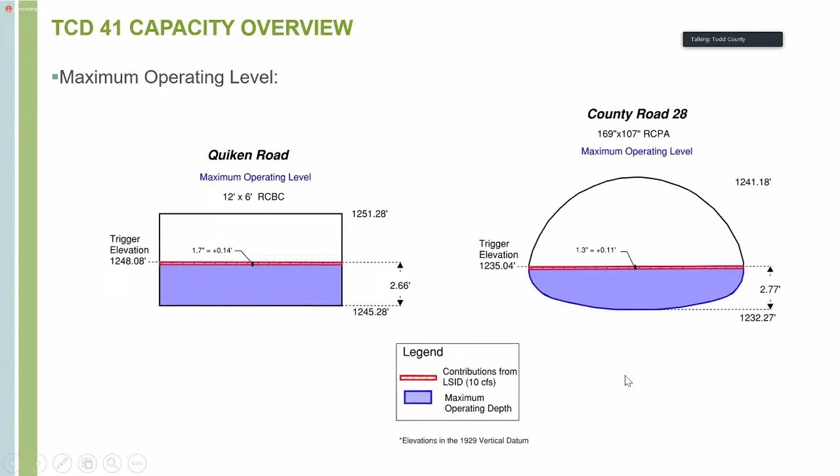All right, and I'm locked up again, so I'll give it a second.

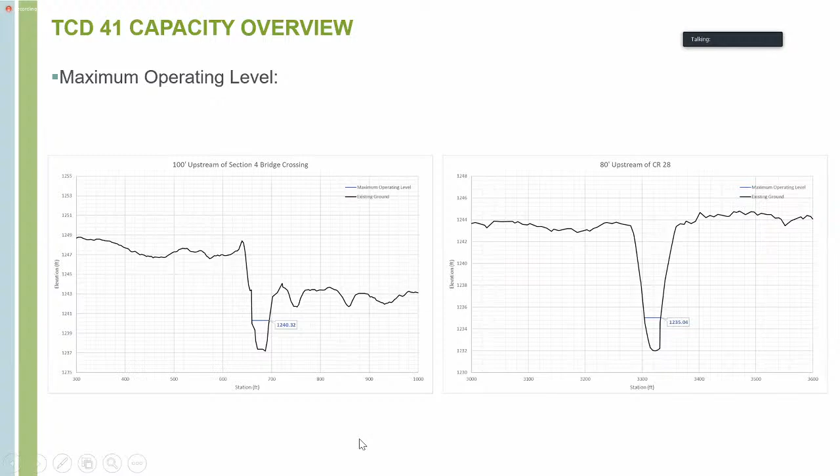Okay, so as I promised, we're going to talk a little bit about laterals. Our surveys and our modeling did not identify any issues in terms of capacity on the laterals. We did identify that they could definitely benefit from a clean out, but those clean outs aren't necessary to account for any flows from the proposed project or to address any potential impacts.

It flows generally northerly and joins up with the main ditch, which continues north there. We took some shots at County Road 7, and we took shots at the confluence down there in the main ditch. We found that the water level at County Road 7 was 5 feet higher than the water level in the main ditch. So the main ditch isn't backing water all the way up to County Road 7.

The modeling we did indicated that if it's cleaned out, it should be much lower at County Road 7. So the conclusion there is that there are likely some obstructions in between County 7 and the main ditch. And in talking with Nancy, I think that's something that they're aware of and likely will be confirmed through some drone flights here coming up.

The culvert at County Road 7 is about 4 feet higher than the bottom of the channel in the main ditch, so in a cleaned out condition there's definitely plenty of fall there. And the modeling doesn't indicate that adding additional flow into the ditch, which really isn't additional, it's just flow utilizing the excess capacity in there, is going to cause measurable negative impacts at County Road 7.

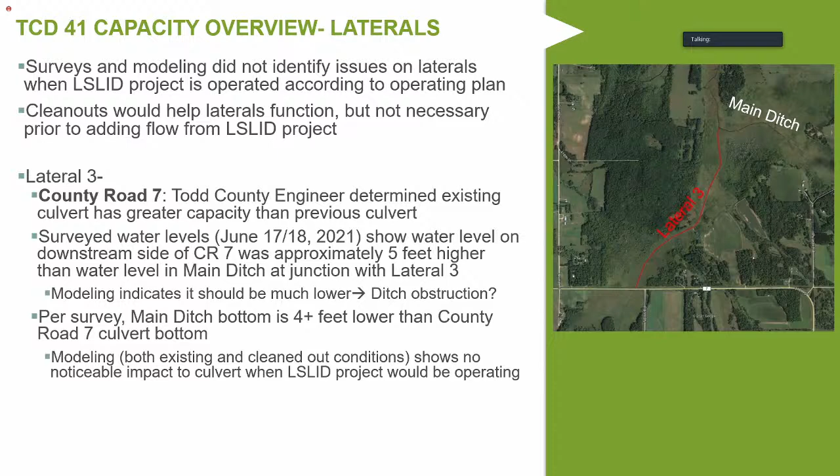So the old creek loop, again that's maybe my term, but just to clarify, as we get at Quiken Road area here where the creek loops out and around, wanted to touch on a few key things here. While that was included in the original design, it wasn't constructed, but it is the outlet for a few laterals. There's a lateral here, and there's a lateral coming in here and one over there. So it is accepting water and then ultimately conveying that back to the main ditch.

We found that there's about 6 feet of drop from the culvert through Quiken Road down to the junction of that creek loop with the main ditch. So, assuming obstructions can be dealt with, there's definitely a lot of fall there to keep the water moving. But again, none of that water is going to be coming from the LSID pumped system.

There's some questions brought up by a property owner here near the confluence regarding, I guess, a meadow or some haying that would be desired in that location. The next slide, I just kind of want to show that.

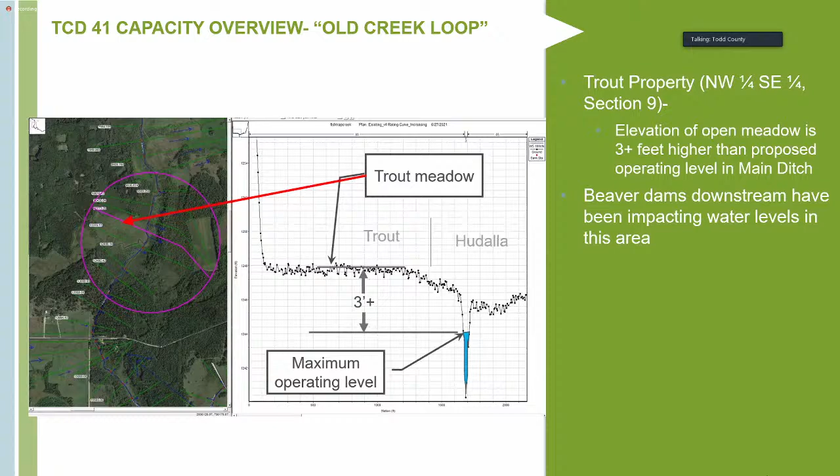One other point, just there were beaver dams particularly identified back in November. And so we can definitely tell from the drone footage that those dams at that time were backing water up at least as far as this confluence and probably farther. So if folks were seeing flooding and issues back in there in recent years, a lot of that I think was attributed to beaver dams that existed in that area.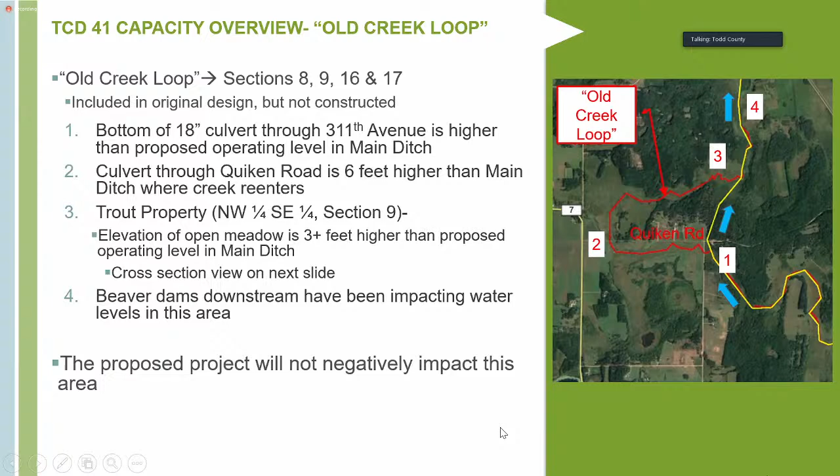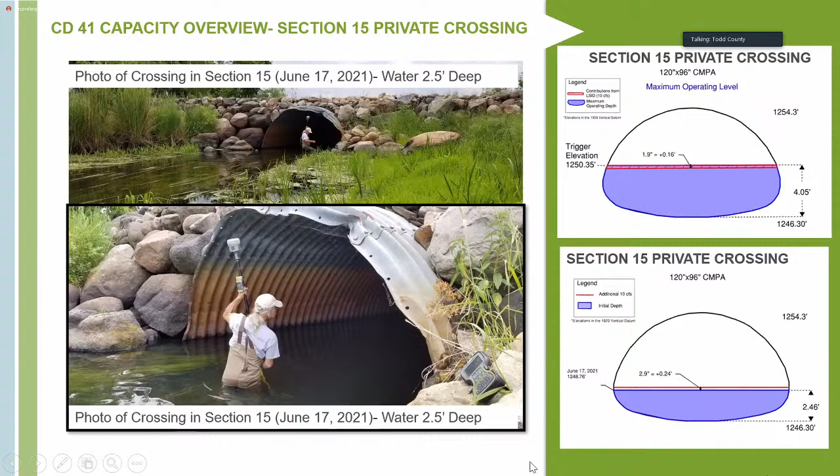On the right, this exhibit shows the maximum operating level we're proposing. The water would be just over 4 feet deep in that pipe, of which only about 1.9 inches would be attributed to the 10 CFS from the project. Looking at the water level we surveyed on June 17th, that was about 2.5 feet deep - you can see that marked here. If the pumps had been running that day, we'd be 2 to 3 inches deeper with that 10 CFS. So again, pretty minimal impact with the proposed operating conditions.

We've had questions on channel erosion. There's been a lot of erosion on that lower end. We determined that section of the ditch down there is actually 13 times steeper than it was designed, which is pretty significant. That culvert at County 28 is about 6.5 feet lower than what the original plan showed it would be. After years and years of that erosion, I think that's what's caused what we see down there and what you saw in those photos.

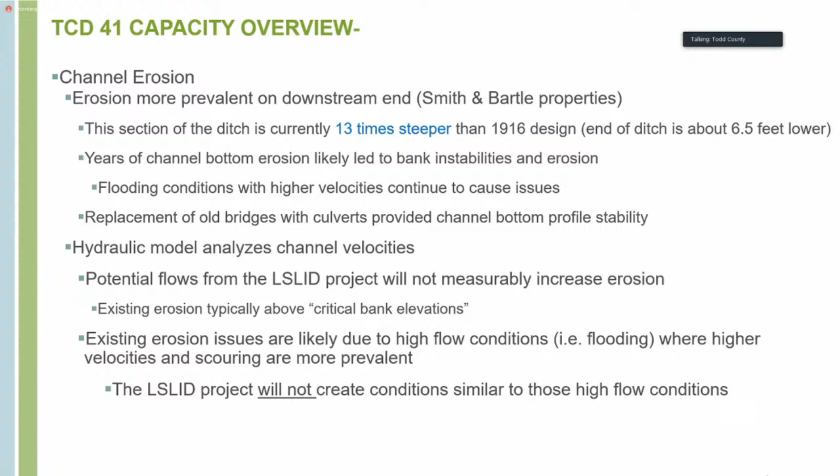At this point, the establishment of culverts with hard bottoms instead of bridges with soft bottoms has kind of stabilized things, locking them into a more stable condition, which is good. More importantly, the potential flows from the LSLID project are not going to be running up into that eroded area. Even so, the analysis shows adding 10 CFS to normal flow conditions down there increases flow velocity by approximately 0.1 feet per second - pretty minor, and it's not going to lead to additional erosion there or anywhere else in the channel based on what we're seeing.

I just want to talk about this - we discussed it at the public hearing regarding other modeling that had been done. Widseth Engineering, formerly known as WSN or Widseth Smith Nolting, was commissioned by Morrison County to look at a similar project with a slightly different flow rate of 3.9 cubic feet per second. Their analysis, summarized here for 2, 10, and 100 year events, showed anticipated impacts of adding that flow. If we scale that up to approximately our 10 cubic feet per second, the results are consistent, which gives us greater confidence in the modeling that's been done.

I think this probably helps negate the need for further looks into this, but we can certainly have that discussion if that's desired.

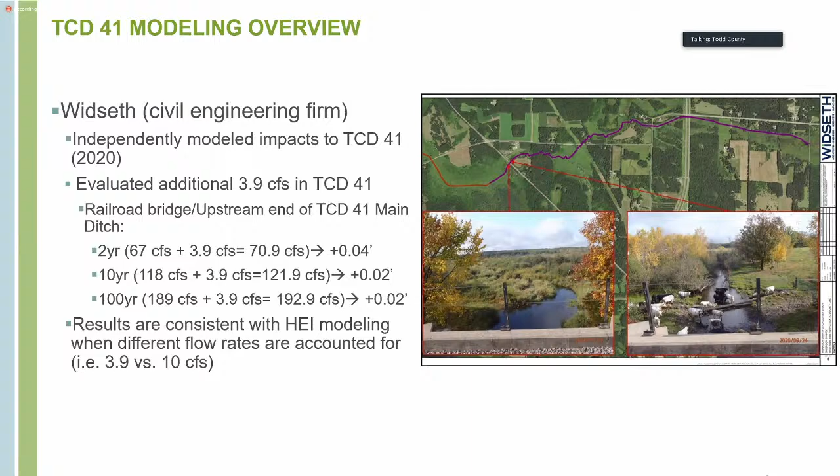Now we're wrapping up the discussion on the ditch. I know there may be some questions on the Long Prairie River, so I want to cover this quickly. There's a model that the DNR and FEMA have, so we utilized that. In terms of the flows in the river, the LSLID project is a drop in the bucket. We're looking at a 100-year flood well over 2,500 cubic feet per second here in Long Prairie, and with the additional watershed at Philbrook, it's over 5,700. We're not going to be running water when the river's flooding anyway.

So let's look at more likely conditions. At a 2-year condition, shown on the lower right, adding 10 cubic feet per second when the pump is running results in about 1/100 of a foot - a fraction of an inch. That will still be addressed in the operating plan. We'll have gauges downstream on the river and utilize the USGS gauge.

I also want to point out that taking the water down through the river system is something the DNR will cover - we've met with them on numerous occasions and they're comfortable with the operating plan as is. They want your input on Todd County Ditch 41, but we're not looking further downstream into the Crow Wing or the Mississippi or any of those reaches, which is consistent with every other outlet project we've done. At some point these impacts become negligible, and particularly when conveying water below the ordinary high water mark, it's not subject to permitting approval and isn't something we need cleared ahead of time. So we need to get the ditch petition done, and then we'll go through the process of permitting and finalizing all these details.

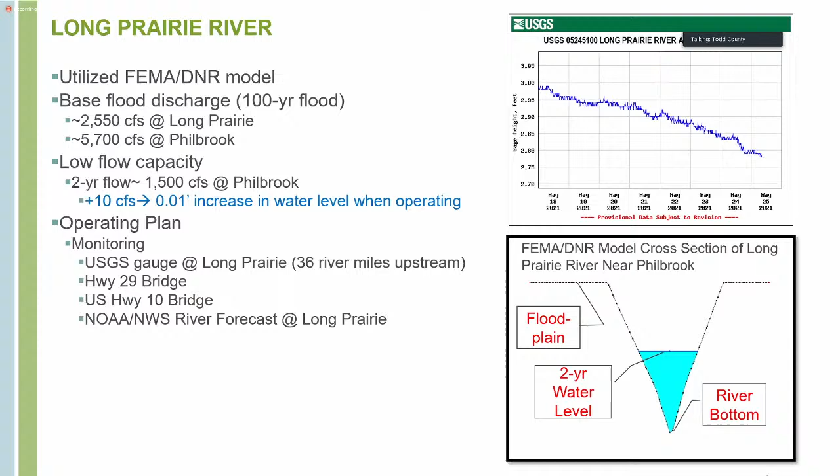All right, so now for the 9th inning here, at least as far as the presentation, we're back to the operating plan.

So we've talked about some of the analysis we've done. Again, it's a tool to help us provide some guidance and information to finalize this operating plan. We'll talk about monitoring locations, water levels, monitoring frequency, and notifications.

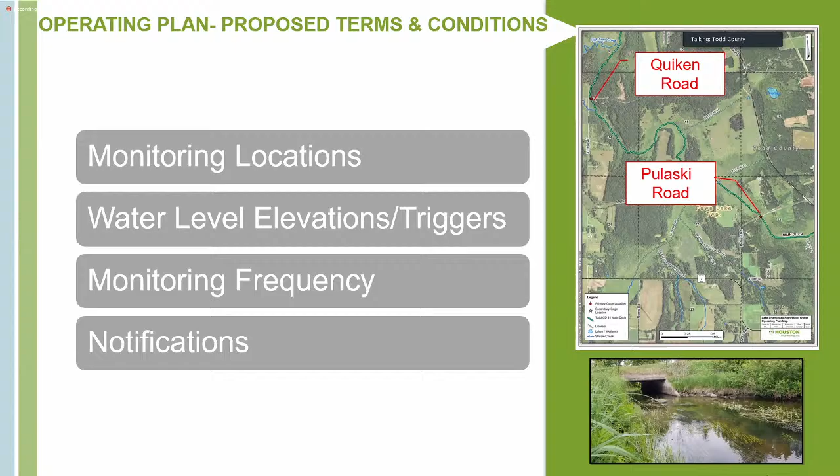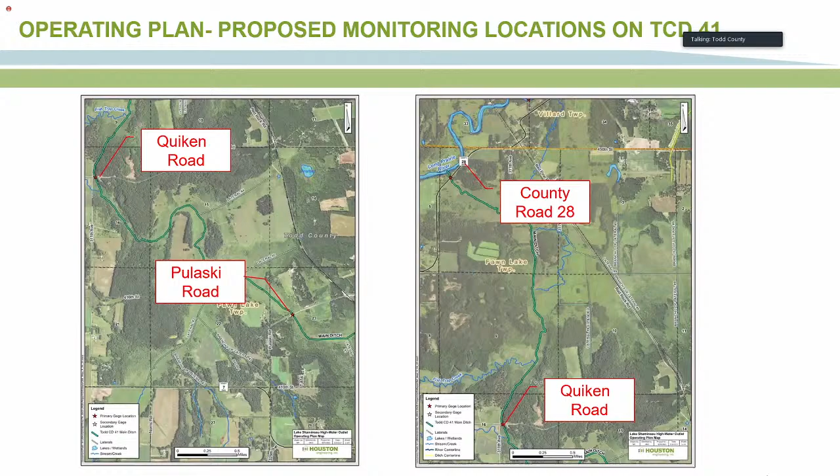So the current proposal is to have primary gauges at 3 locations: Pulaski, Quiken, and County Road 28. We can certainly have a discussion on additional gauges. Of course, anything on private property, we'll need to make sure that we have access rights for. That's the ideal reason we want to use these public road crossings where possible.

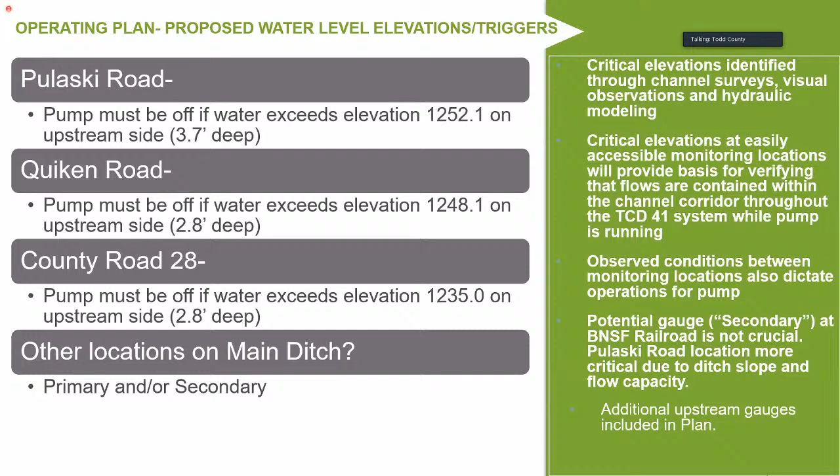So some key points I just want to hit on real quickly. This whole proposed maximum operating level is based on the condition that the water is contained within the main ditch channel, as we showed in the cross sections and culvert diagrams. As I noted, much of the ditch system has additional capacity. It's really set on that one key location just downstream of Pulaski Road. When the water levels are at that maximum operating level, the contribution from the LSLID pump, if it was running at that time, would be less than 2 inches throughout much of the system. So a pretty small impact from that standpoint.

Water will not flow through the 311th Avenue culvert into the old creek loop. Again, we touched on that. Maximum operating levels will not adversely impact the capacity of the laterals.

And just to hit this again, the DNR will require that Todd County's conditions are incorporated into the plan before they approve it. And any future changes that would impact Todd County Ditch 41 would be approved by Todd County through the DNR.

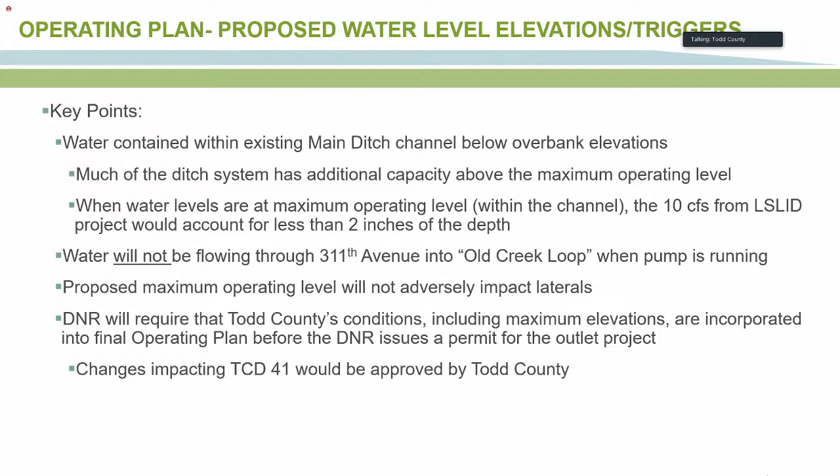So now we move on to monitoring and what's proposed in the plan. Again, kind of taken from the previous templates. As I mentioned, the monitoring will pick up frequency as the levels in the ditch get higher and get closer to that maximum operating level.

So if it's greater than 0.5 feet below that level, our proposal is that we would look at it bi-weekly at the greatest gap in between monitoring. We would do it at least weekly if we're between 1/2 foot and 1/10 of a foot, and on a daily basis if we're within 1/10 of a foot.

Again, this is a starting point. We'll take any feedback on that. I think what the modeling there also showed is that the risk of these tolerances we're talking about, as you're up to that upper level, is about 2 inches. I don't want to downplay 2 inches and what that means, but that does play into the frequency of the monitoring here.

It won't just be the LSLID monitoring. Obviously, we want those gauges, at least a sufficient number of them, in public locations, so that landowners and Todd County officials and the general public can also monitor them and make sure that things are in order on the system.

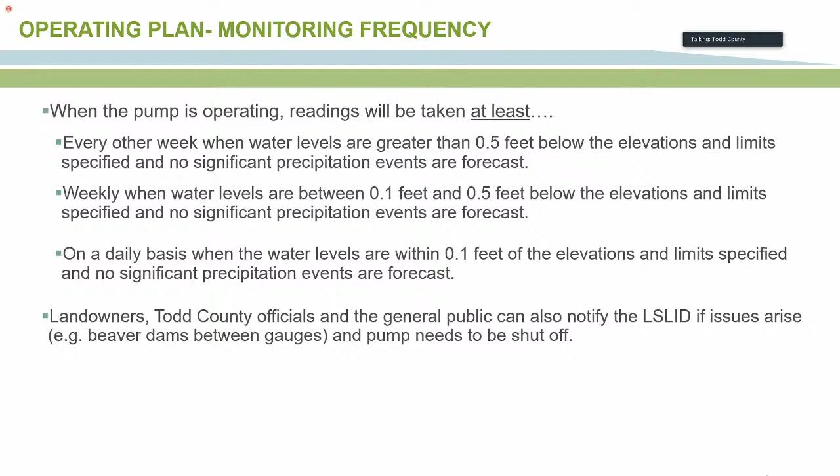Notifications, I know we had a request on this, so Todd County will certainly be notified. Again, we can work out the details on who and by what means, whether it's a phone call or an email or a text or all three. Those are certainly things that we can incorporate your input on into the final plan.

In terms of the process, we've been through the initial draft and got the DNR's preliminary approval. They said it's an acceptable format and function at this point, and we need to get Todd County's input before finalizing. Nothing in that draft will change in a way that impacts Todd County Ditch 41 before it goes final. If there were changes, we'd come back and have discussions with the county. Future updates are likely simple things like contact information and updated maps, but any significant changes impacting the ditch will go through a discussion and review process with the county.